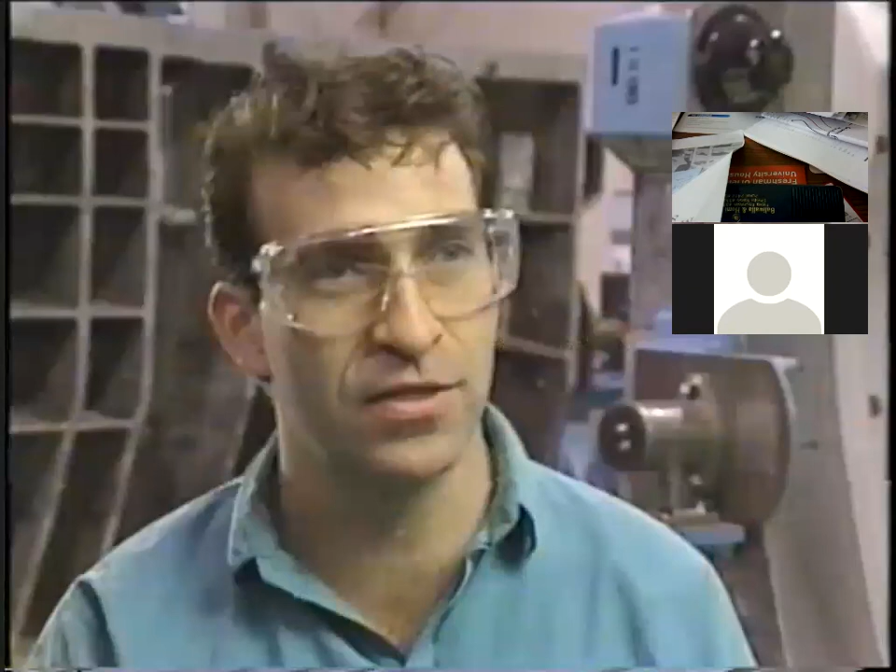Initially, I thought the 5 S's were just another one of those things that we're going to do to make upper management happy. The thought of working out of a community toolbox didn't seem possible. And our feeling about it was, we don't have time to mess with this. We have a lot of parts to build and deadlines to meet.

I didn't have a good feeling about it. I felt it would just be a waste of my time. I just wanted to do my work, and I thought it was just going to be another program that would come and go.

Currently, I'm glad we got rid of the personal toolboxes, because now I see we don't need them. I have my shadow board, it has all the tools I need to do my job. So we've had plenty of time to see that it actually does work.

So we're pretty excited about it, and it's part of our everyday process now. It makes our work easier. I can go home at night feeling that I've accomplished something rather than looking around for something all day long. Now everything's very well organized, and it makes our jobs go much smoother.

These two groups of Boeing employees have been practicing the 5 S's for some time, and they're experiencing the results every day.

A quick comment on this. I'm not going to show you the second part of the video, which is about how 5S was applied in the office. Again, you will see that this is an old video. Phil Condit was the CEO of Boeing decades ago, and unfortunately, he had a not very good exit because apparently on his watch, there were cases of sexual harassment, and he did not take action.

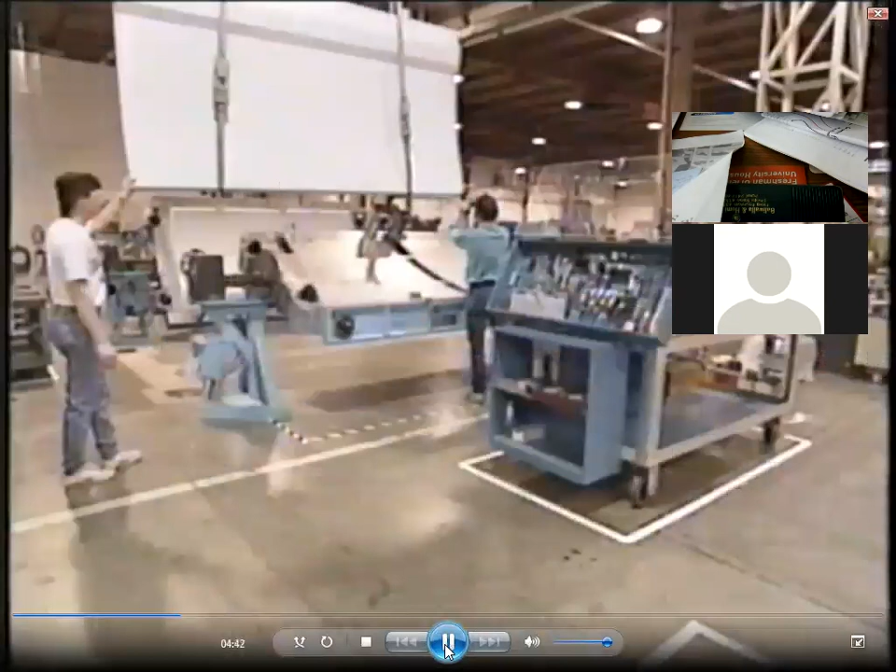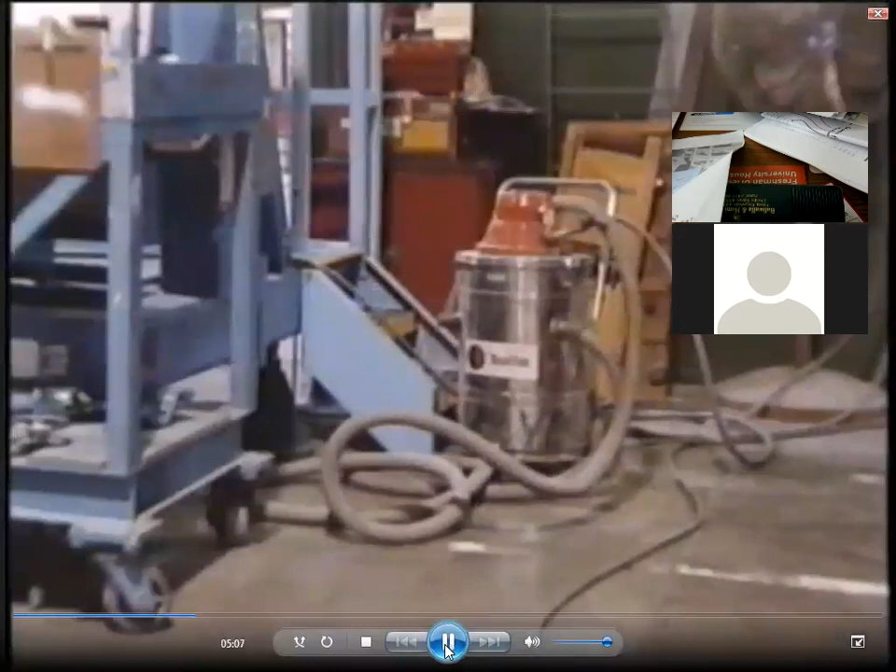Before we implemented the 5S's, our area was pretty much a mess. We didn't know it at that time, but we had workbenches that were serving as benches, tool storage, lunch tables. We were storing parts on them. Just about wherever we could put something, that's where it went. The first step to making changes in the area was the first S, sorting.

It was actually a lot of fun. It was surprising in the end when we had sorted everything that we deemed unnecessary. The big pile of stuff we had in the middle of the floor was just amazing. We had 2 or 3 SA dollies full of stuff that was carted out of here that we had decided weren't really a necessary part of our process.

It was really amazing. In the beginning, it was hard to get rid of things, but when we looked at the reality of the issue, we had to decide, do we need it? And if we don't need it, we get rid of it. If we do need it, we need to decide how much of it we need to keep in the area, and we need to have a permanent location for it.

Okay guys, the first thing we're going to do is the first step, sorting. And the way we'll get started in order to...

Sorting is not a one-time thing in this area. Several times since their initial sorting, they've repeated the process, and in doing so, have removed even more unnecessary stuff. The process starts with agreeing on sorting criteria and designating areas for small teams to tackle.

So this is important, the sorting criteria, and basically what you're doing is you're looking at every item that is in the workspace you're trying to 5S, and you're looking at usage frequency at 3 levels. One, use daily. Two, use weekly. Three, use occasionally. And of course the 4th one is where none of these 3 criteria are filled.

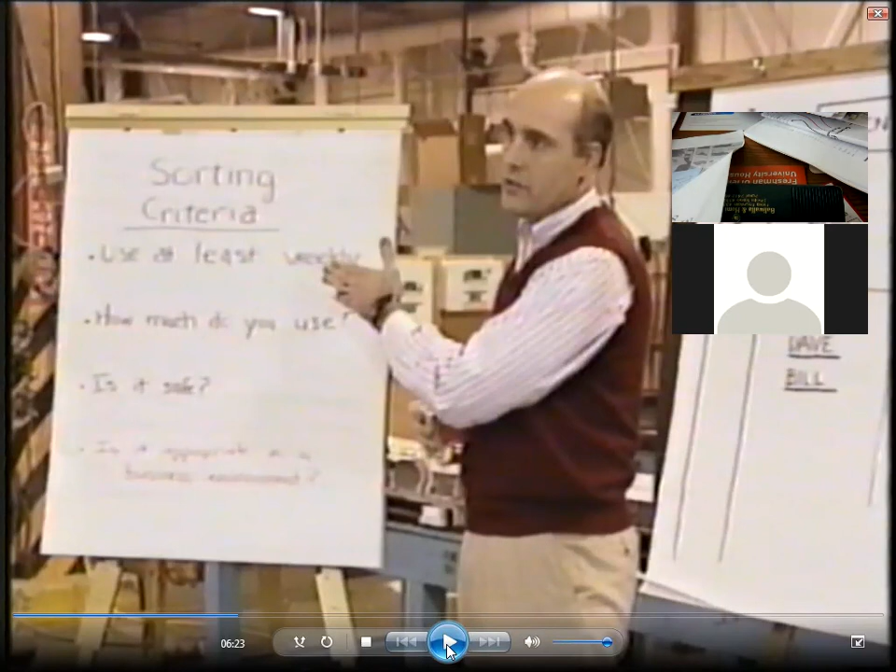Daily, weekly, maybe, but for sure not immediately in the area of work. And of course the 4th one is, yeah, this is junk. So please follow the conversation. To use it at least weekly.

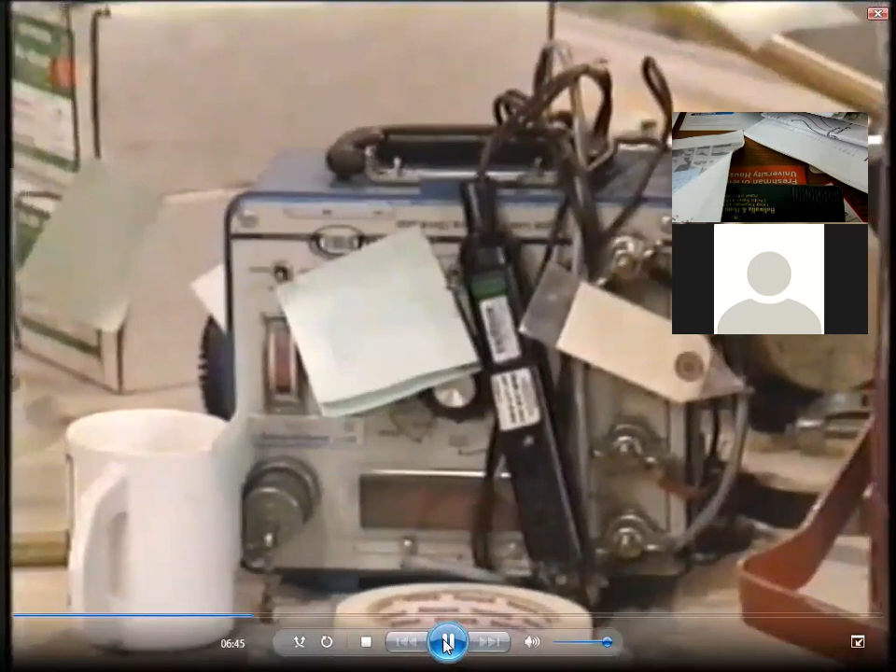The team members touch every item in their assigned area and decide if it's really needed. If they think an item is not needed, it's tagged with a Post-it note and brought to a holding area. Sounds good, I don't know what they are. Let's tag them and we'll find out. Okay, sounds good. Later, the entire group reassembles and holds a sorting auction.

Now, through the auction, they must reach agreement on whether the tagged items are indeed unnecessary. Nobody uses it anymore. Oh, let's get rid of it. Get rid of it? Yeah, all right.

Okay, we have 3 boxes of these bulbs, VG 10K42s. Who uses these? We do. Everybody does? Yeah, we use them on the main landing gear doors. How often do you use it? We use a box up in a month probably. But you use them every day? Yeah. Well what do you think? Think we ought to maybe take 1 box and leave it in the area and send the other 2 to surplus or to standards? Yeah.

Okay guys, for those of you who are taking the production planning and inventory control class, what they are verbalizing is essentially what we learn as basic inventory control models. So what do we do in inventory control? I have an item and I have a usage, I have a consumption rate, I have basically a reorder point when I should order stuff, and then I have a reorder quantity. And then I have a maximum inventory I wish to hold of this item.

If you go back into your production planning and control textbook, I use the one by Sipper and Bulfin, a wonderful book, applied and theoretical. Look at the way the inventory model is specified. There'll be a maximum inventory, a reorder point inventory, and the reorder point is managed so that the lead time is buffered against. If it takes X days to get the replenishment quantity, then that reorder point represents a certain amount of inventory, which will be consumption rate per day multiplied by the number of days it will take for replenishment, plus say a 10% safety factor.

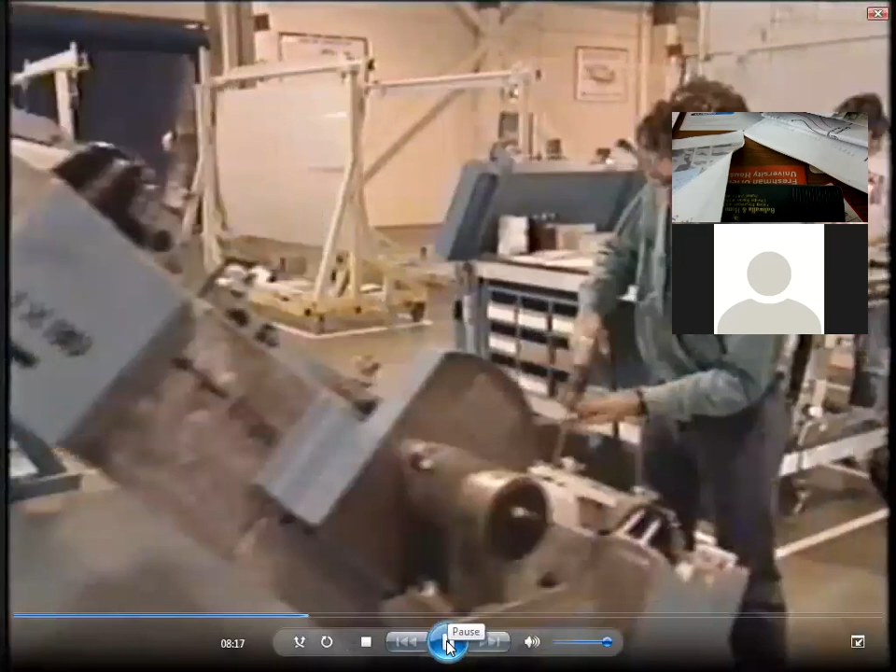Simplifying really means organizing and arranging everything that's needed so you can do the job efficiently and safely. The landing gear doors employees have created some excellent examples. They designed these mobile work tables for each of the door assembly tools. Attached to each table is a shadow board. It contains and organizes all the tools, drills, and bits they need to work.

So do you see the mobile workstation? It has the work surface, it has the tools, it has the parts, it has the gauges, and you can move the workstation to any and every location that you need. So mobility is a huge aspect of modern factory design.

I've even seen machine vendors basically saying this machine can be moved. What they do is they stick like an inflatable balloon under the machine, and then they blow it up and poof, they literally can pull the machine to its next location. So please keep this in mind: a mobile workstation, something which can be moved, and see how well it is organized.

If you see this outline, if the outline is exposed, it means somebody has taken the tool and needs to return it by the end of day before they go home. And if it is filled up, that is where the tool should be. But the condition of the tool should be as when it was taken away. You cannot put back a broken tool or a damaged tool.

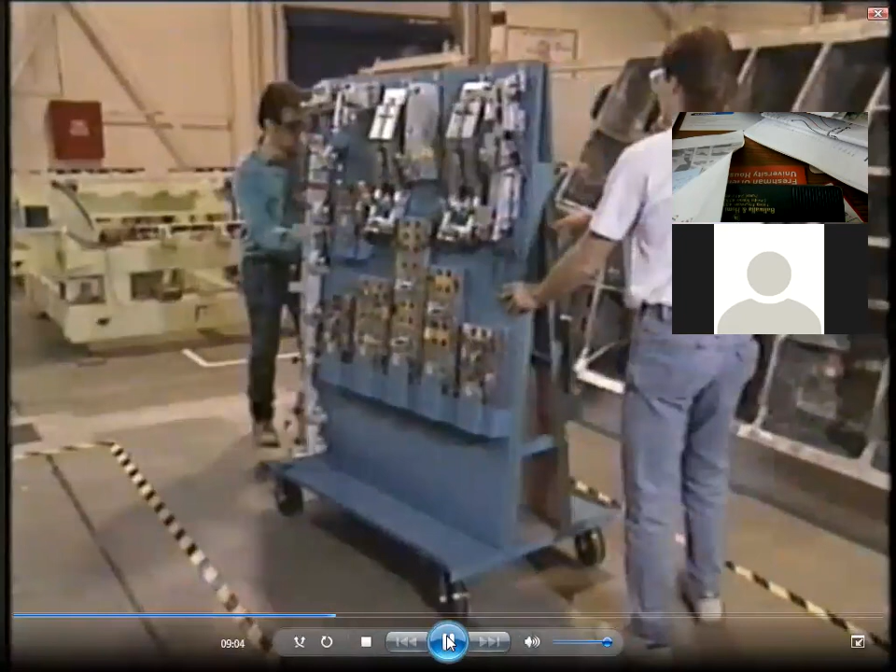Another shadow board mounted on a cart holds the drill plates that get mounted on the door assembly tool. Some of these plates weigh over 40 pounds, but because of their arrangement on the shadow board, there's no more.

Do you see now? I don't know if you study ergonomics, but that's a very big area of industrial engineering study. Ergonomics, safety, and a conducive work environment are areas where you win over employees when they hear industrial engineers and management are going to come and implement lean, thinking lean means fewer employees are needed.

No. When you look at ergonomics, do you see they've taken these fixtures and put holding handles on them? The heaviest and most used fixture is kept at the center of the board, at the safe lifting height, kind of in the midriff. So keep in mind that 5S is also about safety and ergonomics.

Bending and twisting is required to lift them into place on the tool, and the cart's mobility saves a lot of steps toward carrying a heavy load. Notice that labels on both the plate and the shadow board make it clear where the plate belongs.

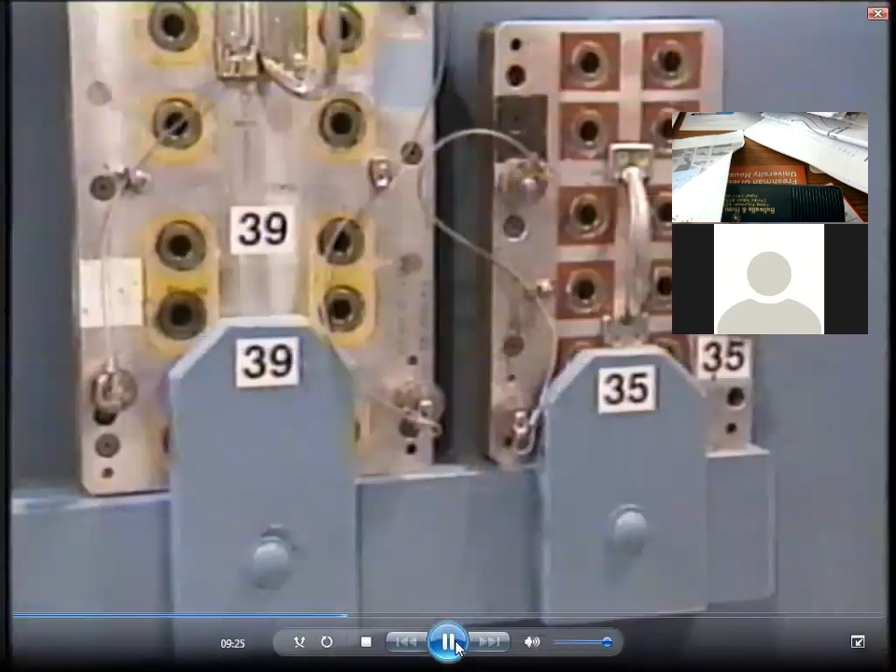Outlines on the floor clearly tell you where things that can be moved should be located, everything from mobile racks. These are white markers, and this is the identification—this square is the location for such and such cart or workstation. That is how beautiful this method is if correctly done.

If somebody is in training, they don't come in and ask what am I supposed to put in this area. Right over here, there's a label, and that label will be painted in several places on this fixture, for the doors to garbage cans and hazardous waste containers. Hazard stripes identify danger zones around equipment.

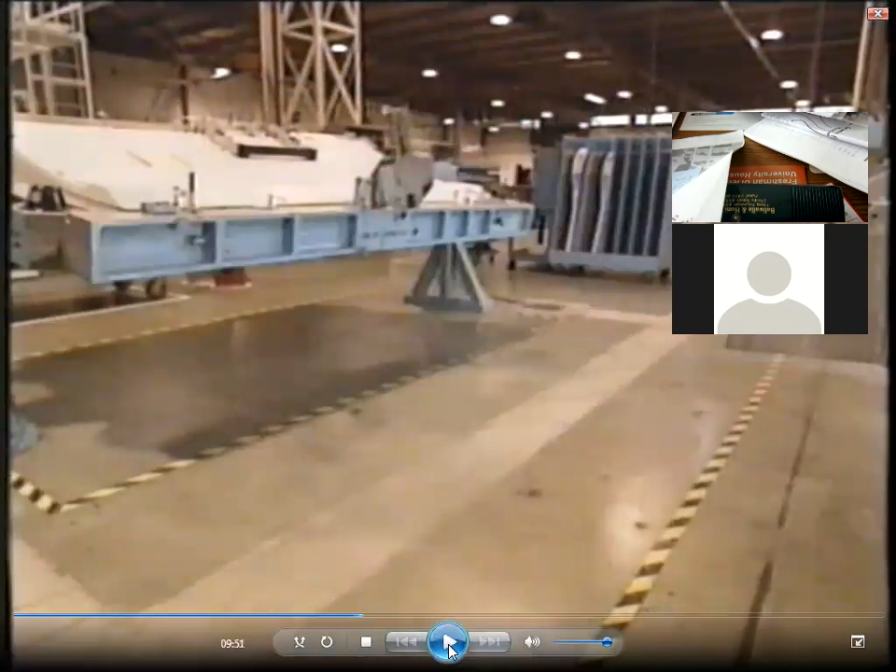Possibly the most significant change in the area is the disappearance of personal toolboxes. It's taken a while, but let me share with you why toolboxes are such a sticking point. My experience has been that it's a two-pronged sword.

Tools are typically purchased by the plant manager, who reports to the director of manufacturing or the vice president of operations. If the plant manager sees that his or her boss is cost conscious, that person is not going to agree to buying the company's own tools and gauges.

And eliminating these toolboxes. So what ends up happening is individual operators, like machinists, will say, for me to do my job, I need fixtures, measuring devices, and other instruments to make sure the quality of my work is correct. If management won't buy it, I'm going to buy it myself.

Unfortunately, those gauges have to be calibrated by inspection. When there's no accountability and personal tools aren't being calibrated, that is exactly where you end up with situations where parts are delivered to inspection and inspection says, sorry, this failed.

So disappearing toolboxes and creating what I would call community tool boards is important. There are challenges in maintaining that board, but the big thing is that all the gauges and instruments being used are standardized, managed, maintained, calibrated, tracked, and recalibrated by the shop. That's the important part of disappearing these toolboxes.

So I visually sweep the area for anything that is out of place, including our shadow boards. If some motors are missing, they're usually on the bench somewhere. I'll grab them and put them back. This is something I do throughout the day.

Of course, for a truly clean workplace, physical cleaning is also part of their sweeping routines. The physical cleanup is a disciplined part of 5S, and you have to clean, you have to sweep.

Let me share with you several personal experiences I've had. I've taken tours of many facilities, and what has been impressive about those where I had a positive client engagement is this: when I was given a walk by their plant manager or director of manufacturing, if they saw a gum wrapper or some kind of plastic lying around in the material handling aisle, they stooped down, picked it up, and kept it in their hand, saying, 'I'll be talking later, we need to keep this place cleaner.'

That shows an attitude. Let me share a very positive experience with a client called Superior Completion Services. Once on the floor, I had my safety glasses kind of stuck on my head and hadn't pulled them down. I was in the shipping area where mainly assembly occurs, but the area supervisor walked up and said, please, would you put your safety glasses on? That is how well their safety director had ingrained the safety principle of 5S into their employees. Everybody had a right to pull up, advise, or cajole their colleague because it was a company standard of safety.

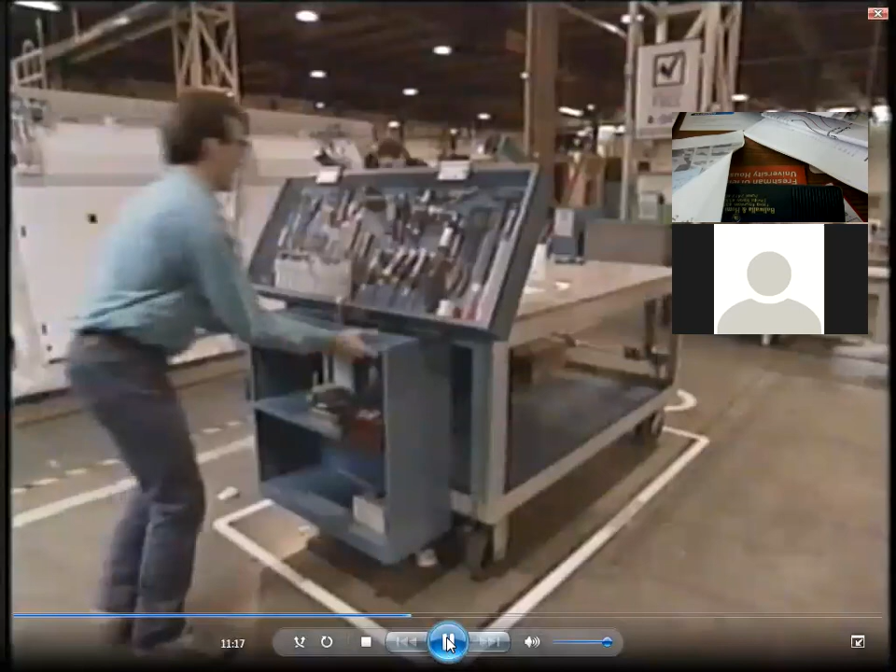By the way we have our area set up now, it's much easier. There's no clutter, not a lot of things around on the floors everywhere. So the cleaning is real easy. Since most of their equipment is on wheeled carts, the group can sweep and clean up more efficiently and thoroughly. It's an ongoing thing. You can't just say, well, we clean up 15 minutes at the end of the shift. We don't do that. It's ongoing, always.

Standardizing means having a specific process that everyone follows, no variation. Remember the Toast Kaizen assessment we had for the course? I think till now probably only one team has done it well, and that's not their fault. I think I misled them that the eVSM software has a good template. I don't think it's very good.

But standard work instructions, even for making toast, right? Basically you design the toast making process so it has the least number of steps, the least amount of quality problems, and the least amount of labor content. Same thing - this is standard work instruction.

Why? At a certain point, anybody can be trained to do a particular job in a certain way. And if you attach videos online on a local server, training can be done asynchronously. But the beauty here is that safety is taken care of, quality is taken care of, cycle time is taken care of - because there's a standard process being adopted.

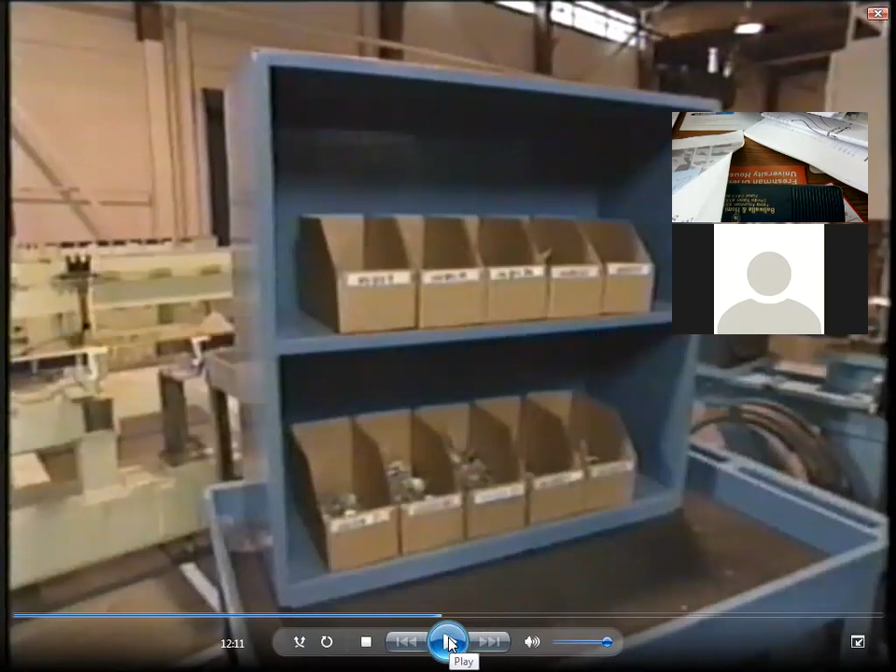Do you see, for those of you who are mechanical engineers and familiar with design for assembly - this is one of the big areas. Designers who sit in the office and don't talk to shop employees just pick a fastener for a design. Material is different, threading is different, tensile strength is different.

Over time, even for such basic items, there's so much upfront cost to purchase and hold inventory of each item, put reorder point labels, and pay for a minimum buy quantity - just for little items, forget the high-end ones. So when you standardize, you even come back and ask, do I really need so many fasteners? You can apply that thinking across the board to hardware items.

You can even apply that to bar stock, raw material sizes across the board, and to tooling inserts. So standardization essentially impacts how much time, money, and material you waste because of the changeover from one type of item to another.

Arranged on a mobile cart, this order matches the standardized sequence in which they install the fasteners in the door.

Another example of standardizing are the shadow boards for the two door assembly tools. There are shadow boards for both the left and right doors. The crew designed the layouts for these shadow boards to be identical, eliminating searching for tools when switching from work on one door to the other.

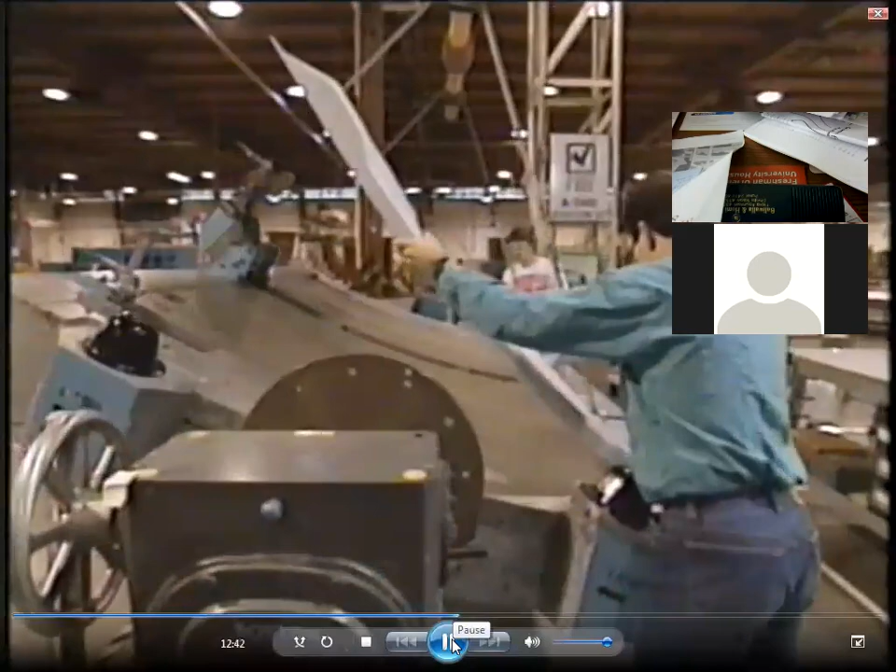As an outgrowth of their 5S activities, the group has also begun to standardize some of their work processes. In the past, before the 5Ss, we used to put tools or do our processes in any open space that we had on the floor.

Doing the 5Ss has really organized us. We now do our process flow. Our incoming comes in, it's identified, it goes straight into our tools, out of our tools, onto the floor to do the floor work, into seal.

What shape of the alphabet is this? U, correct? You see, in assembly, the U shape makes complete sense. You take something, a line of a given length, and you almost split it into thirds: 1/3, 1/3, 1/3. Inside is where people work, outside is the logistics. That's pretty much why U layouts are so popular for most work cell arrangements. The paint, it's almost like a horseshoe effect.

It is not easy to be self-disciplined in the 5S program. It's something that you grow into. It becomes natural, it becomes habit. The longer you work at it, the better you become at being self-disciplined.

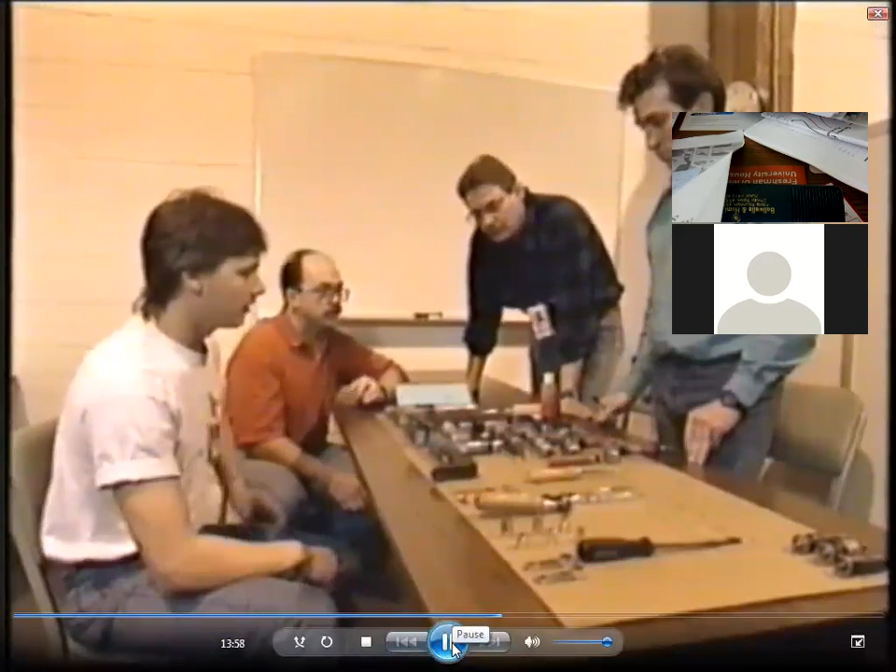Self-discipline is just something you have to have if it's going to work. In our case, on the FHAs, if you run out of a certain size drill bit, the self-discipline kicks in when you go and replenish that drill bit supply instead of sneaking over to the other FHA and stealing one of their drill bits or something like that. But self-discipline goes—watch this portion.

This is essentially layout done at the workstation level. So the whole challenge is: I have so many tools, and I need to find locations for all of them. In this case, they have what is called a functional layout, meaning all tools of the same type are arranged by size in one area.

I don't agree. I think there are situations, especially in maintenance and repair facilities, where they've actually created toolkits—tool bags hung on the walls with labels. For this task, pull this toolkit. For this task, pull this toolkit. People just walk up, pull that bag, and walk to the site because that's the task they wish to do.

So again, a lot of this is videotaping, and you can see people working, but everybody gives input saying why: because when I do the work, this is how I use various combinations of tools. So the 5S Shadow Board process is a very team-oriented, analysis-oriented activity.

Beyond the individual, the group has learned that they must work at the 5S's as a team. This includes getting input from everyone who could be affected by a 5S improvement. Everyone has to participate in 5S. It isn't a one-person thing. It's a group effort, and without the group, you're done.

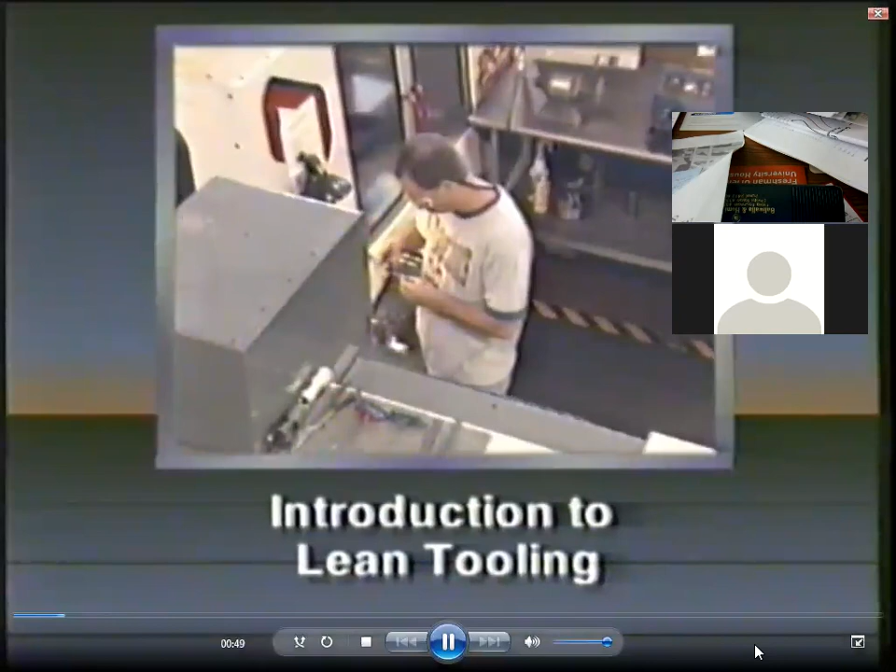This program is an introduction to lean tooling and shows you how it's used to cut costs, reduce lead time, and improve quality. Many companies are turning to lean manufacturing to reach the high performance output their customers demand. Regardless of what type of manufacturing you do, machines and tooling play a critical role in your business performance.

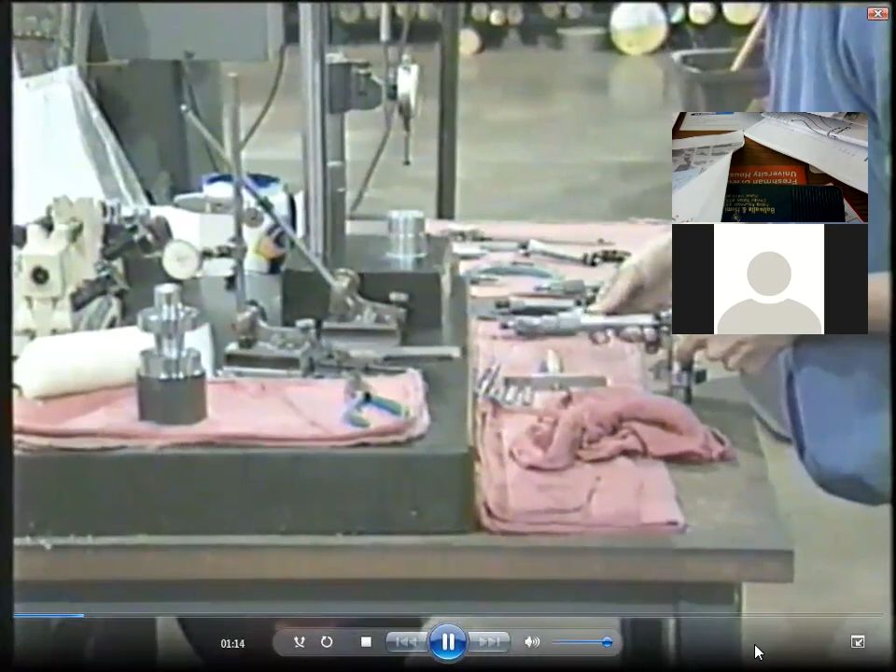The basic thinking behind lean manufacturing programs is the elimination of waste. Much of this waste is caused by the poor management of tooling, inserts, clamps, and gauges. Lean manufacturing defines 7 wastes that are so costly they're known as the 7 deadly wastes. They include searching and waiting, transport, excess inventory, overproduction, overprocessing, unnecessary motion, and defects.

Lean tooling helps eliminate these 7 deadly wastes. You can waste a lot of time during the hunt and search.

That's the main part. If you're going to have throughput, you don't want people leaving the cell, and you don't want to waste time looking for things. You want to make sure a tool is easy to find, easy to keep track of, and in proper repair, so when you go to use it, it's ready to go. This way you minimize scrap, minimize lost time searching, and you can satisfy the customer.

Lean tooling has 2 primary goals. The first is to have any tool in the hands of the person who needs it within 30 seconds. The second goal is to have any tool operational in less than 10 minutes from the beginning of the setup.

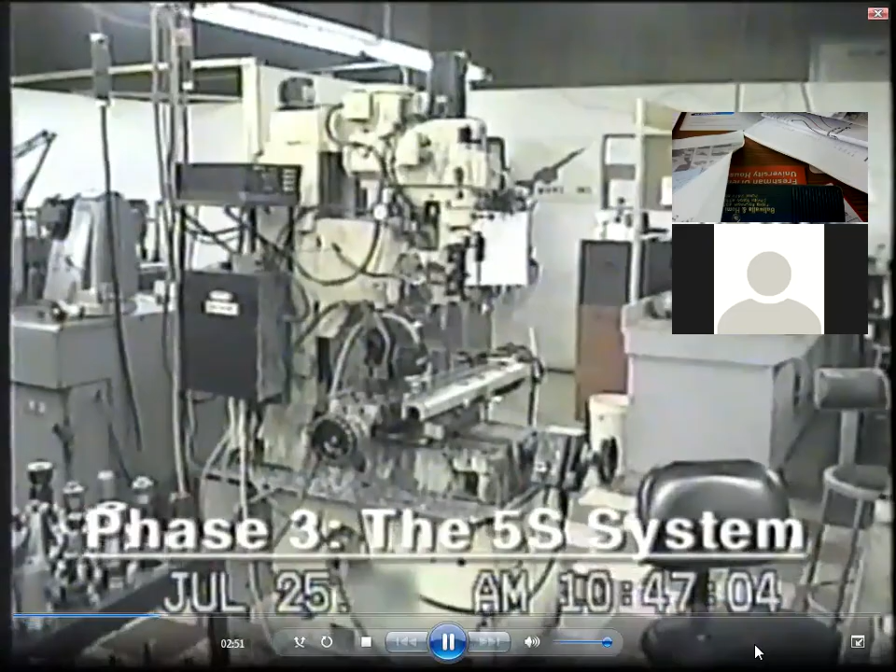An effective way to implement lean tooling is by following a 5-phase plan. Phase 1 prepares the project by creating a clear vision of your goals, getting management support, and forming a strong cross-functional team. Phase 2 studies and measures the problem, so there's an in-depth understanding of all the issues, obstacles, and barriers. In Phase 3, before attacking any tooling problems directly, you must remove many of the generic workplace problems you'll confront by applying the 5S system for workplace organization.

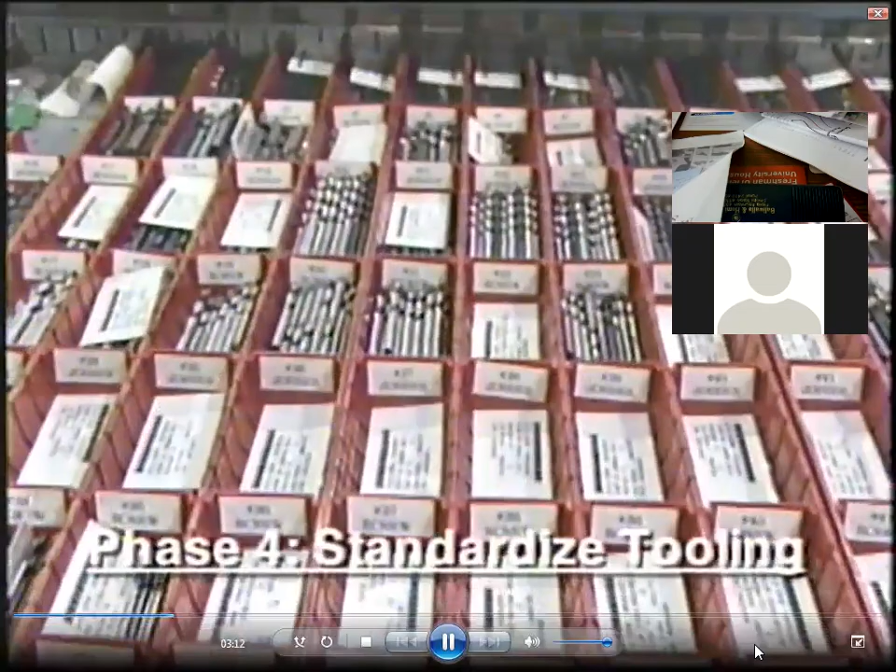In Phase 4, you will standardize tooling activities at the point of use and throughout the plant. You will create new designs for tool storage and management, and implement visual displays and controls. Finally, in Phase 5, you will implement a plan to stabilize tooling and sustain your gains through audits and problem-solving methods.

Three activities occur in Phase 1: getting management involvement, identifying target areas, and forming a core implementation team. The most important of these activities is getting management involvement.

The Lean Tooling Workbook has a list of 10 management issues you can use to rate management involvement. The best way to use this list is to complete it as a group so everyone can evaluate the management commitment. Unless the workers see management support, with upper management directly participating in their teams, supporting their decisions, and helping fund the projects to keep them driving, they feel it's just going to be another flavor of the day.

To get started with lean tooling, it is best to select various target areas for improvement and then prioritize them. Each area should have an assigned champion who has time available for these improvements. But to be totally successful with a lean tooling program, it must eventually be implemented throughout the entire plant.

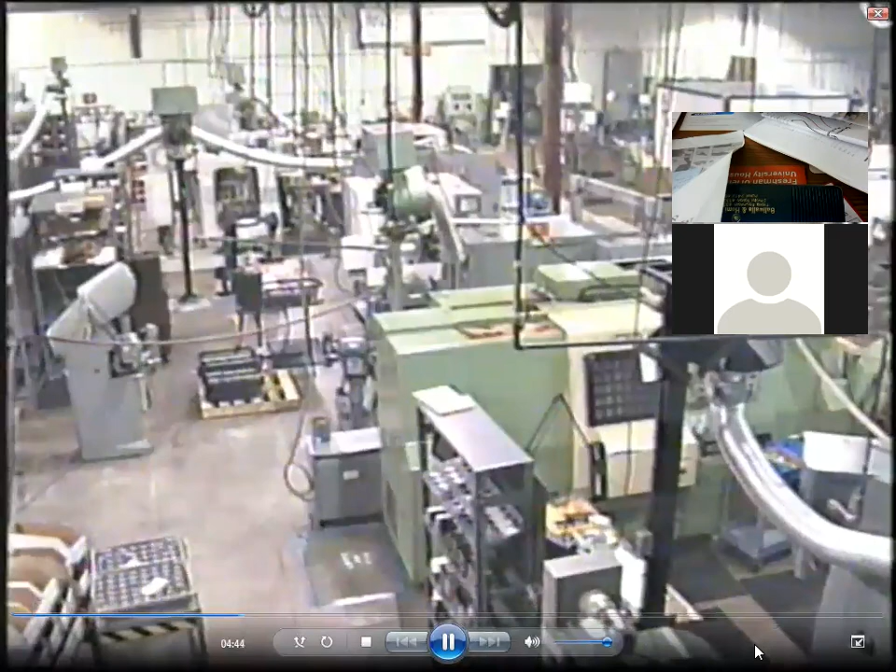As an example, this plant chose to perform lean tooling on most of its machine cells first. Then it moved the tool cage to the center of the factory, changed the layout, and started a Kanban system to control tooling inventory. Their next step was to organize the quality department and remaining cells. Well-planned changes allowed this company to get the most return for its investment and convinced skeptical managers and employees alike of the need for a total lean tooling transformation.

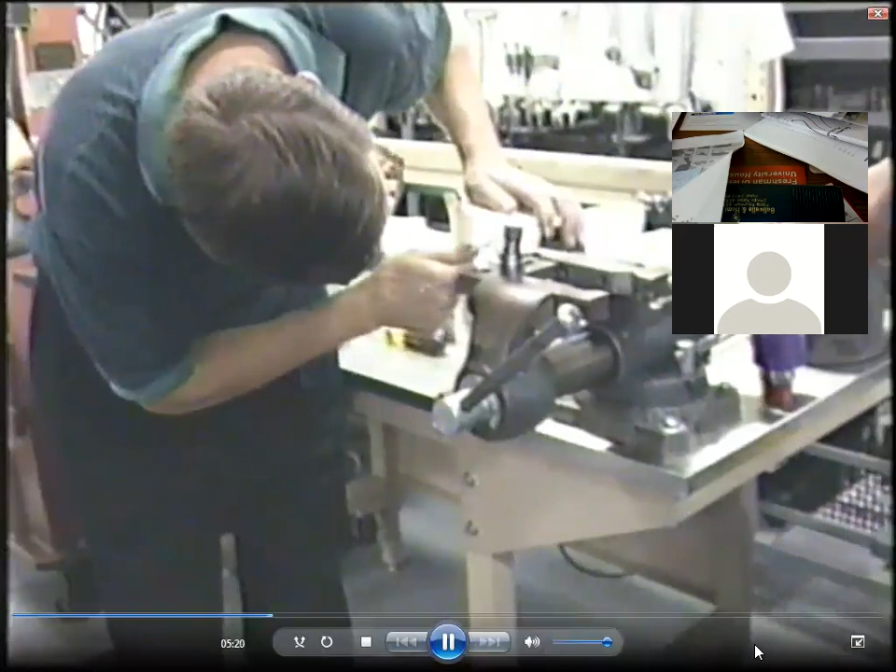Teamwork is crucial to making lean tooling successful. Lean tooling teams must include the right people, with proper authority and the resources to make changes. Members must understand how the company generates profits and how lean tooling affects the bottom line. Each team must also include frontline people who are closest to the details.

Occasionally, a team may have extended members outside of the production workforce, from the engineering or design staff. Now the team is ready to study and measure tooling in the target area.

Phase 2 begins with selecting a way to measure the current productivity of your tooling. Methods such as photography, a diagnostic checklist, a target statement, and a project storyboard can be used to measure your current state. But the focus of Phase 2 is on measures.

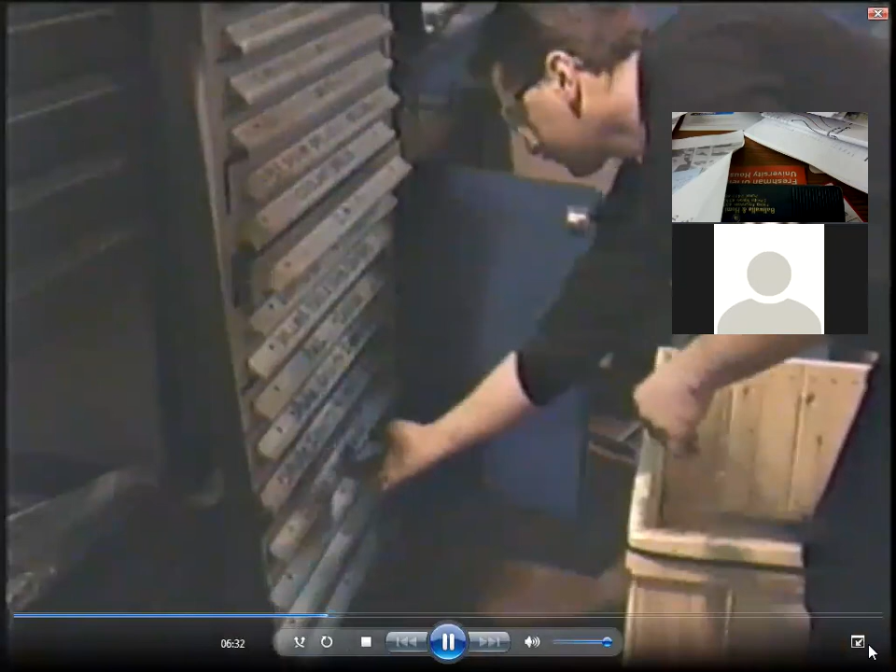Begin your measurements by looking at the two basic goals of lean tooling. The first goal is to have any tool in your plant in the hands of the person who needs it within 30 seconds. So your first measure is how long it takes to get tools into the hands of the person who needs them. The second goal is to have any tool operational in less than 10 minutes from the beginning of setup, so the second measure is setup time.

Setup time is measured from the time you made the last good part to the time you make the next good part. Anything in between is wasted machine time. Another good measure is the percentage of total revenue you spend on perishable tooling.

Of course, to really study the measures, I just wanted to interrupt here to stress a point. You know, tooling, when you look at machine shop supplies, between tools and coolant and fixtures, whatever, I've heard that the total cost could be in the 300,000, 400,000 area. Really significant, and that's just the material purchase cost. You won't be able to believe how much downtime exists when they have a simple blooper.

So what they have is a tool crib in one corner of the shop, and they buy inserts, drills, boring bars, etc., and they keep them there. This is the so-called common tooling. Now individual machinists need inserts, so guess what? They leave their machine and walk to this tool crib. They start looking for those inserts, and the inserts have not been organized. They're basically in drawers with no count whatsoever.

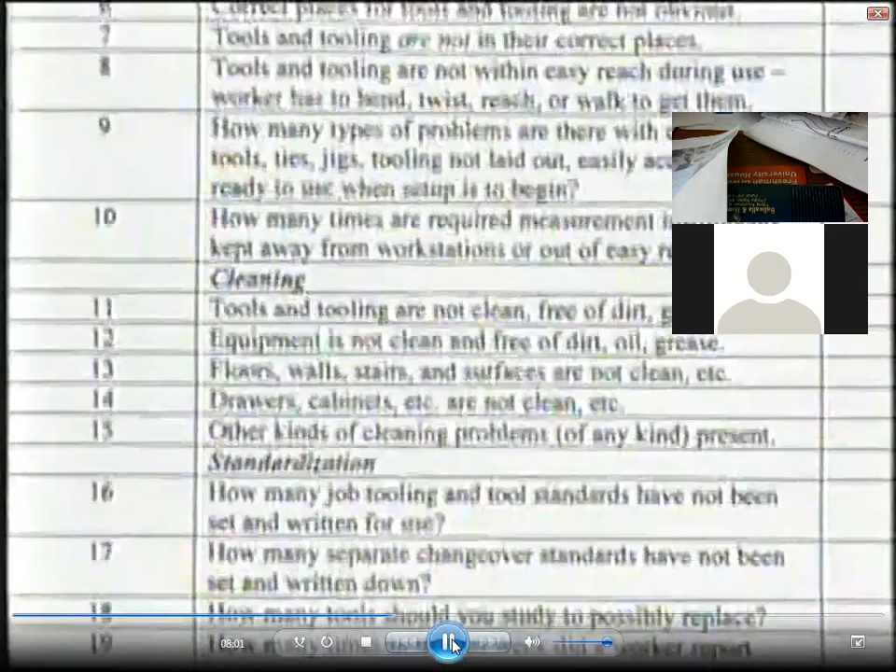Before making any changes, take photographs of the current state. These pictures can provide visual details to measure existing conditions in the target area. While taking photographs, you can also apply the Lean Tooling Diagnostic Checklist. By rating your target area in all 5 areas, you will gain an in-depth understanding of your current state of tooling and a clear list of where improvements are needed.

In most cases, this in-depth examination exposes problems few people knew about.

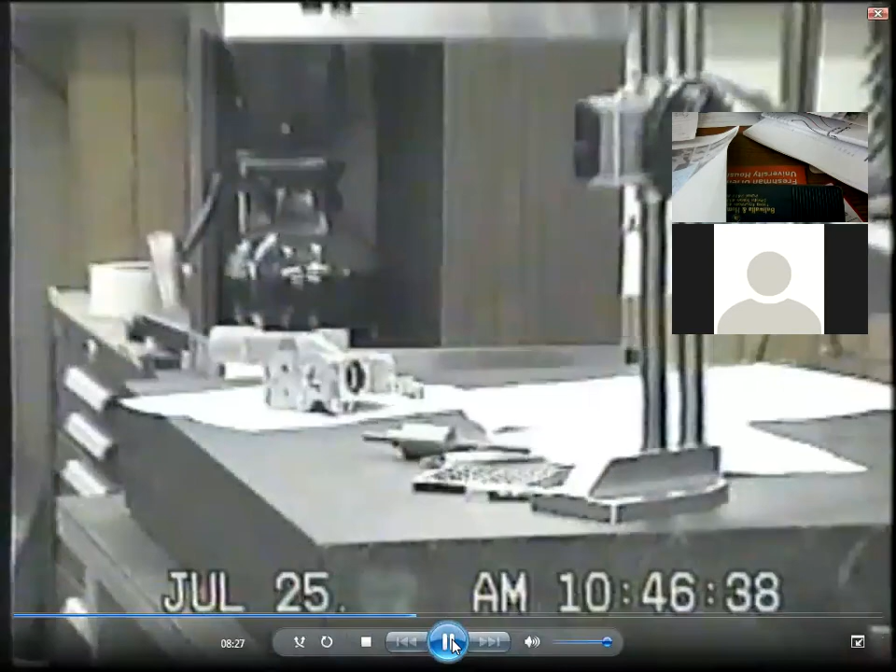Now it's time to bring it all together into one target statement. The purpose of this target statement is to explain exactly what the team is supposed to achieve and how they will measure it. It should be written in simple language. A good target statement also tells us the current rate, target rate, and why it is important to meet the target.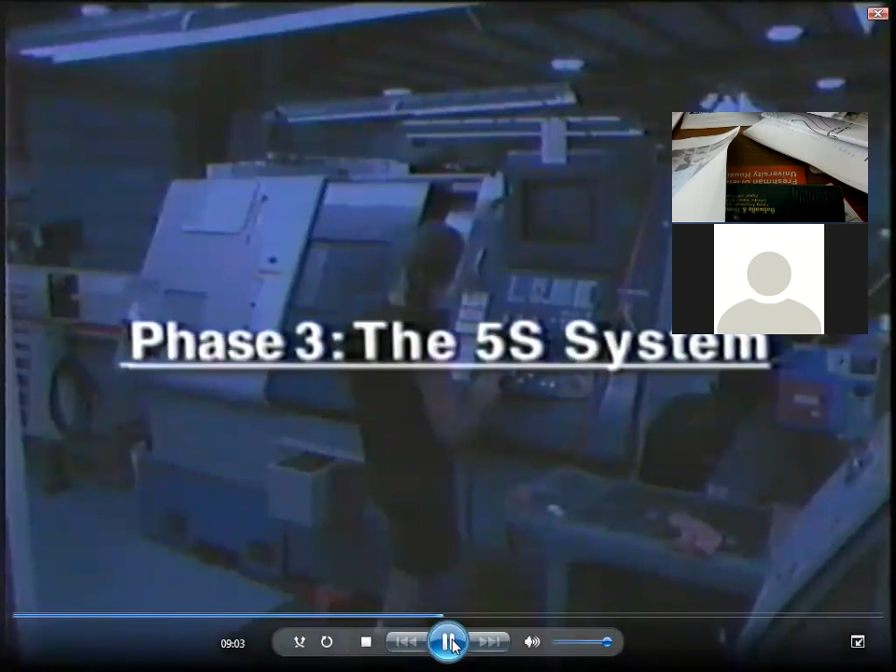Before attacking tooling directly, you need to clean and organize the work area following the 5S system. This will prepare the area for tooling improvements. The 5S system consists of 5 activities with names that begin with the letter S. They stand for sort, set in order, shine, standardize, and sustain.

Sort involves sorting through the contents of an area and immediately removing unnecessary items to a holding area. This includes large items such as old equipment and small items in drawers and cabinets. The rule for sort is: when in doubt, move it out.

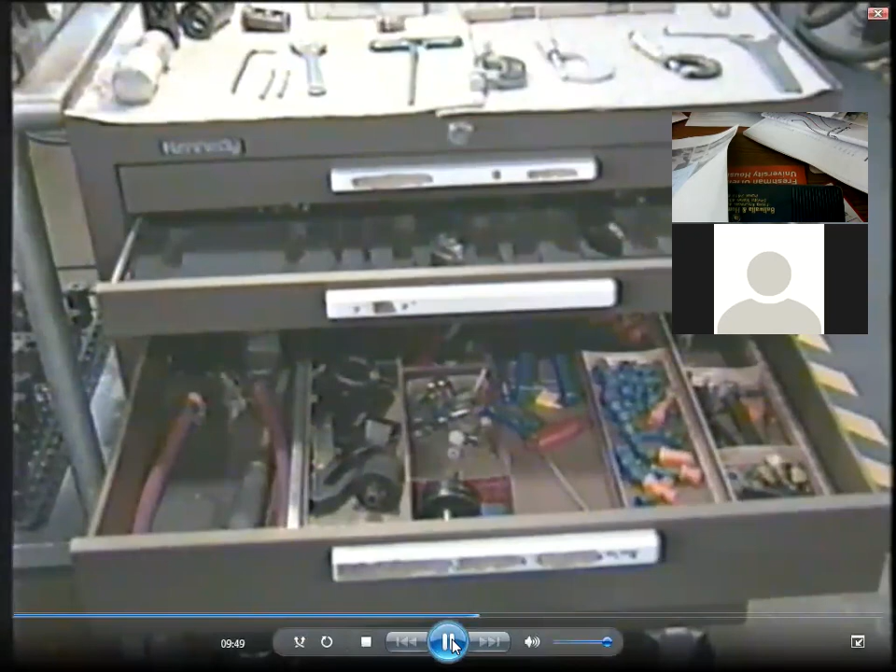Set in order involves arranging items for easy and efficient access and use. There should be a place for everything, and everything should be in its place.

Shine means cleaning everything and keeping it clean. The essence of shine is inspection through cleaning.

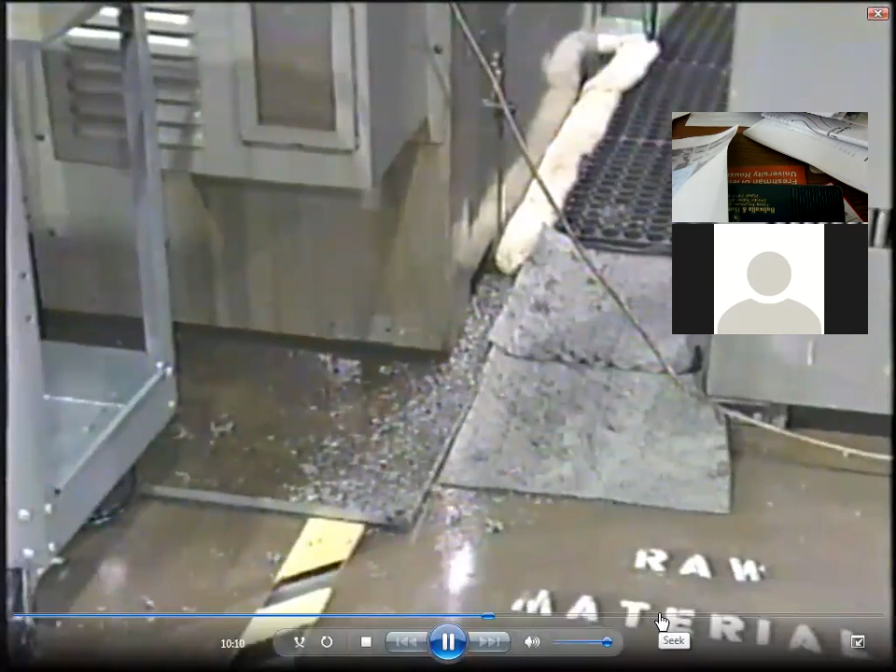Standardize involves creating guidelines for keeping the area organized, efficient, and clean. This includes visual controls such as lines, labels, signs, and color coding.

Sustain involves communication and education to ensure that everyone follows the 5S standards.

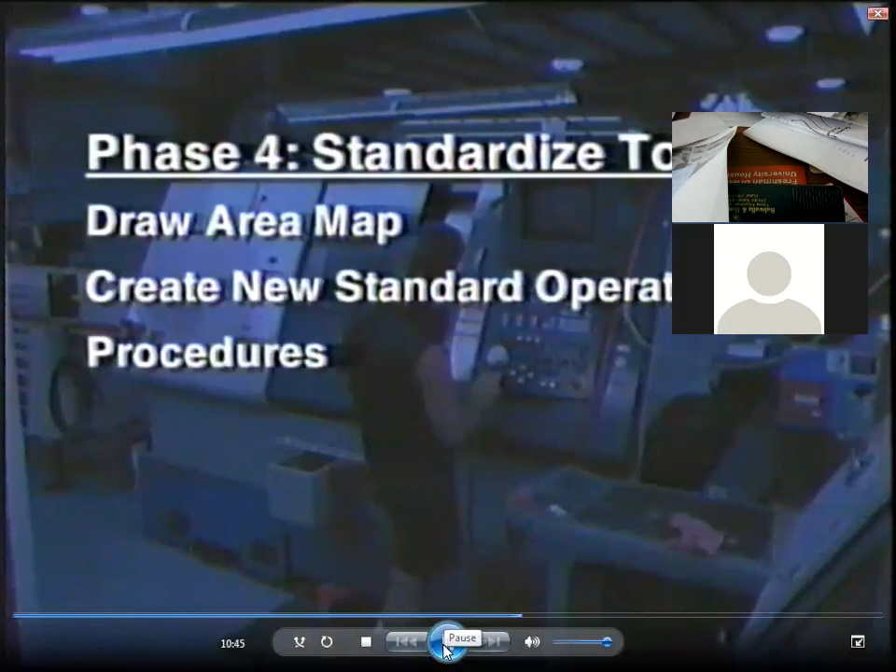In phase 4, you'll draw an area map to understand how your current tooling standards operate. You'll create new standard operating procedures for tooling, bring order to the point of use tooling, and redesign the workplace to support new standards. Guys, go back to the toast Kaizen.

I know it was only a question of, they're just making a slice of toast. But if you look at these steps: draw the spaghetti diagram, create the standard operating procedure. Remember, that was the future state flow process chart. Bring order to point of use tooling. All the tools needed, all the materials needed were at the point where he buttered the slice of toast when it came off the toaster. And then you redesign the workplace to suit that particular workflow.

What you did with the toast Kaizen is basically now applicable to just about any workplace where material is physical. Now, if you were organizing an IT system, I don't know much about that, but again, in an IT system, instead of machined parts, you've got documents, decisions, and data elements being transferred. Same thing. You just have to create a spaghetti diagram and then organize which server, which database, which app will have the appropriate items of information.

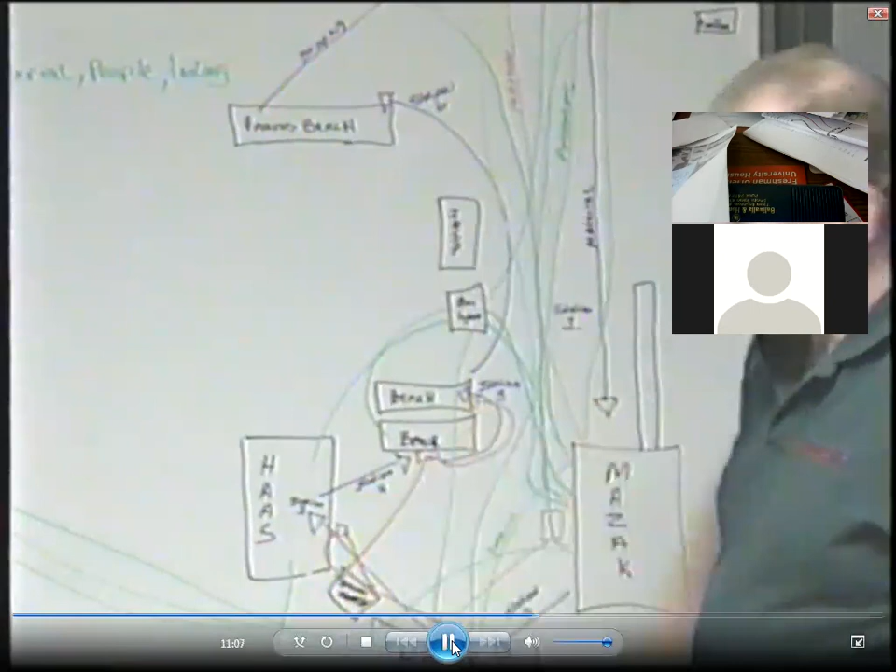Then you'll implement visual controls to reinforce the standards and the new design. The area map shows the position of all items and workstations in the target area, especially tools and tooling. The arrow diagram is drawn on the area map to show the flow of all activity.

As you draw your arrow diagram, pay close attention to where tools are used, delivered, stored, maintained, or reordered, and the routes that are traveled between these activities. Later, when you redesign the workplace, you'll draw a proposed diagram to replace the current state.

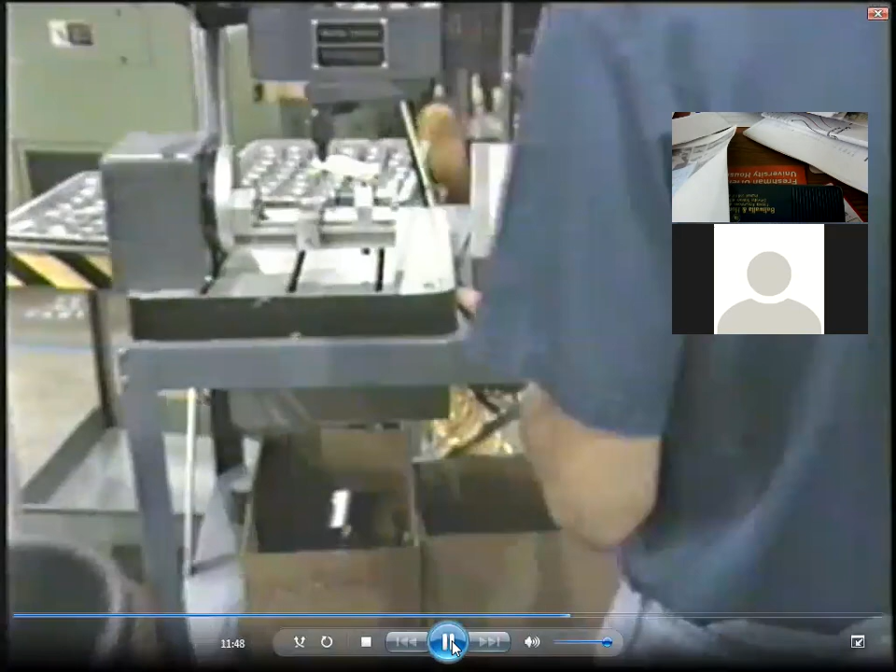Now it's time to create new tooling standards. New tooling standards determine the best and easiest way to perform tooling activities. They also provide a foundation for new employee training. For lean tooling, every activity must have a standard operating procedure.

The best place to start when creating standards for tooling is at the point of use. Tools and tooling are managed differently than raw materials and finished parts. Tooling needs a standard way to be returned after use. In addition, standards are needed for how tools are sent out.

I want to sound some words of caution to you. Be a little careful about not getting too drawn into, ooh, shadow boards, shadow boards. If you notice, many shadow boards tend to be designed for those cheap, hand tool type of items.

You saw that whole storage area for raw material, all the bar stock, so horribly organized. Believe me, when you look at exotic materials and when you buy in bulk, and then as you cut the raw material piece from say 30 feet and now you have drop pieces, drop losses, if you aren't smart about organizing those leftover pieces and reusing them for future jobs, you end up throwing away that as basically scrap, along with all the chips coming off different machines.

God forbid you lose thousands in unnecessary buying, storing and carrying cost of raw materials. So think about 5S not so much for the little screwdrivers, pliers and shadow boards, but the storage, accountability and traceability of expensive tools.

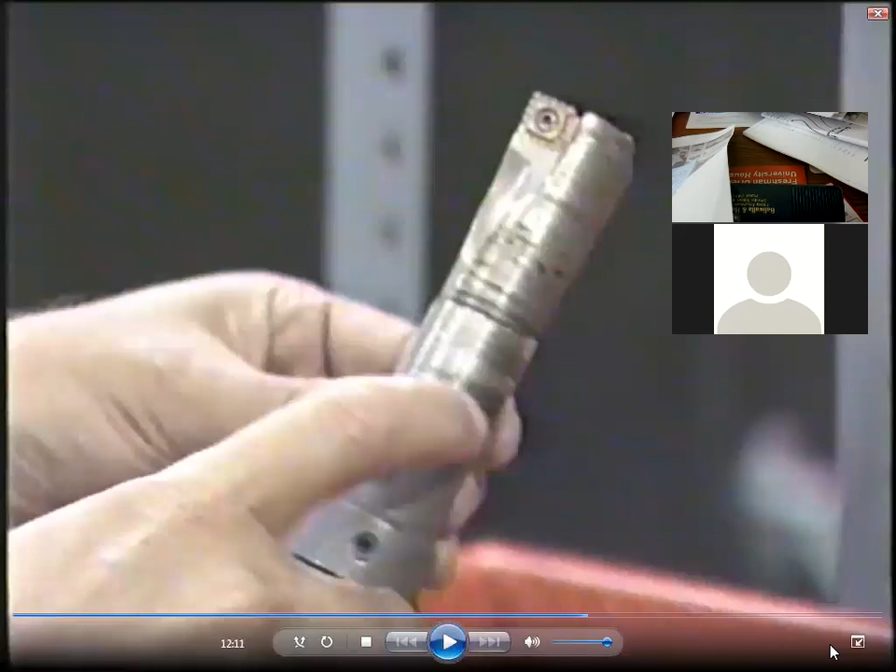Up to be repaired or sharpened. There are 5 simple steps that will bring you better control over your tools at the point of use.

The first step is to remove all the tools from their point of use and return only what you need. When you do return them, store them in logical groups so they can be easily located and replaced.

Next, create visual controls so tools can be located and returned quickly. Clear labels and color coding will help you find what is needed faster.

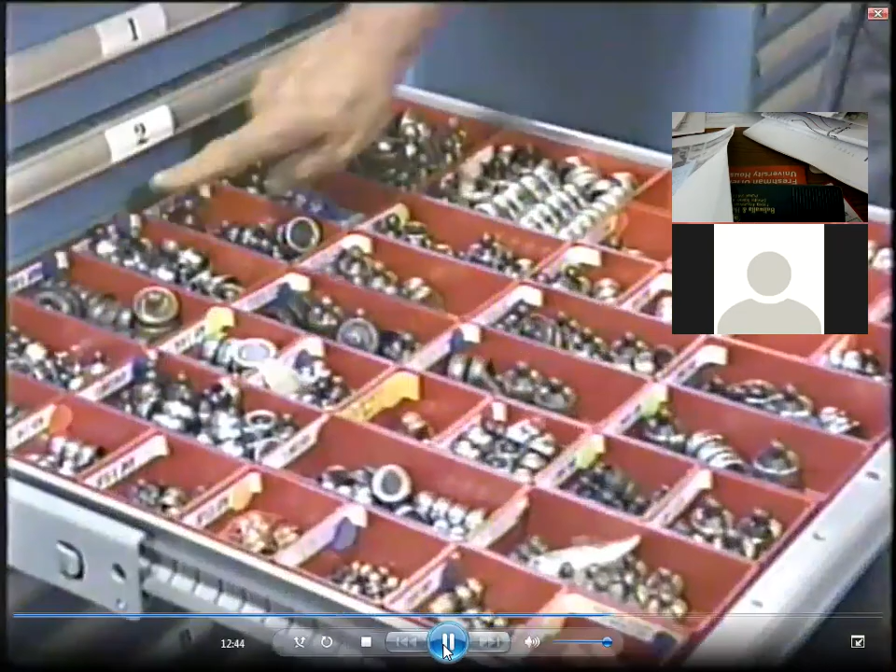The third step is to make the point of use design so simple that the worker knows it by heart. Other methods include putting tools in the order of procedure or enlarging dimensions so tools are easy to grab.

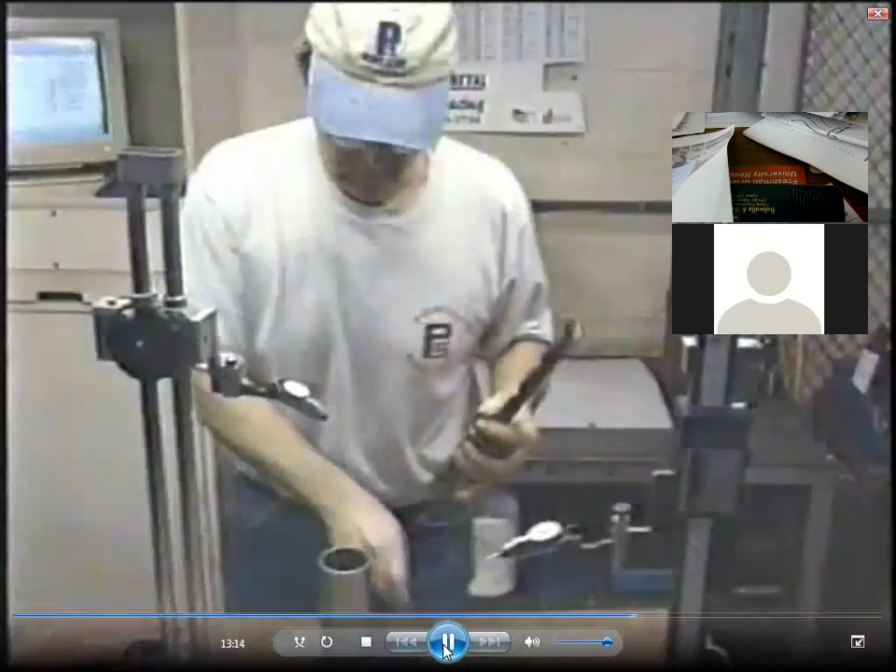The fourth step for point of use control is to install retractable tooling. The fifth step is the elimination of tooling. At this level, you try to eliminate the need for a tool entirely. You'll often see elimination employed in setups where much of the work is performed prior to shutdown, therefore eliminating the need for any point-of-use tooling.

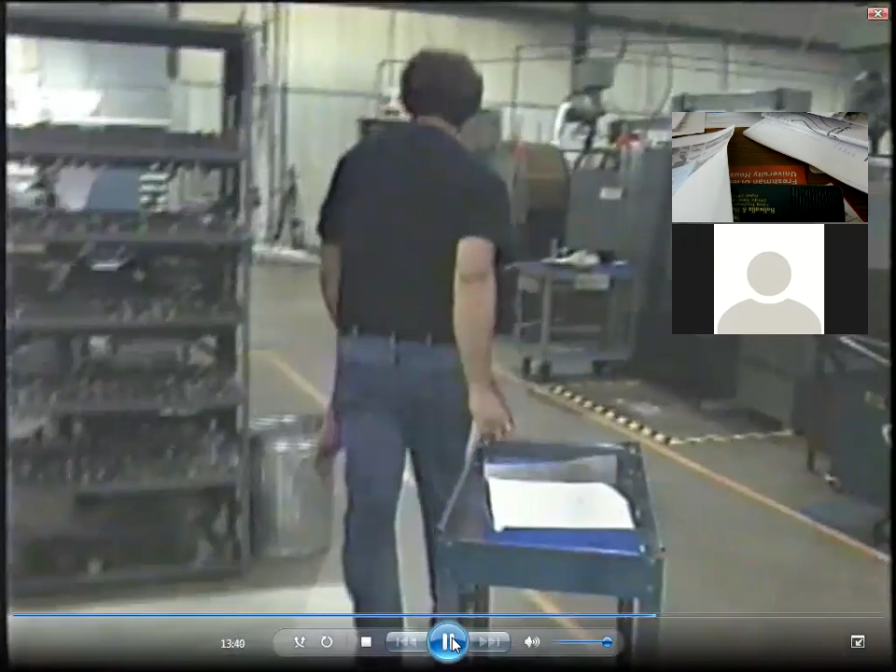Lean tooling requires a new way of looking at things. One issue to consider is eliminating personal toolboxes to free up floor space. Since many tooling activities happen away from the point of use, designing efficient methods to move tooling is important.

The first method is... let me add a little bit here. They've shown a person pulling a tool cart. Google the term water spider. The water spider is essentially a shop logistics person.

Some of the best people you can have is to take some of your best machinists and convert them into supervisory or water spider roles. Why? Because as a supervisor, you're assigning jobs to different machines. Also, as supervisor, you have one person's oversight on the tools, gauges and inserts being collected for a particular job. So now what happens is that machinists stay at their machines.

I've heard that fully burdened rates for machinists could be anywhere from $80 to $120. Now, when you look at a basic machine shop of 20 machines, and the machinists are going around trying to get the tools and things, that's a lot of downtime on the machines, as well as payroll paid for non-value added work. And that lost time is then made up through overtime over the weekends. That's a lot of money being lost.

So this water spider, I think, is a very important logistical role that most machine shops may or may not implement. Personally, that's the first thing I try and do.

I implement work cells, and I try to do the supplying of the work cells - everything from bringing parts to rolling away parts, tools, coolant, instructions, first article inspection, everything. I try to ask, gentlemen, can we bring a couple of water spiders on every shift to operate the shop? So that role is very important.

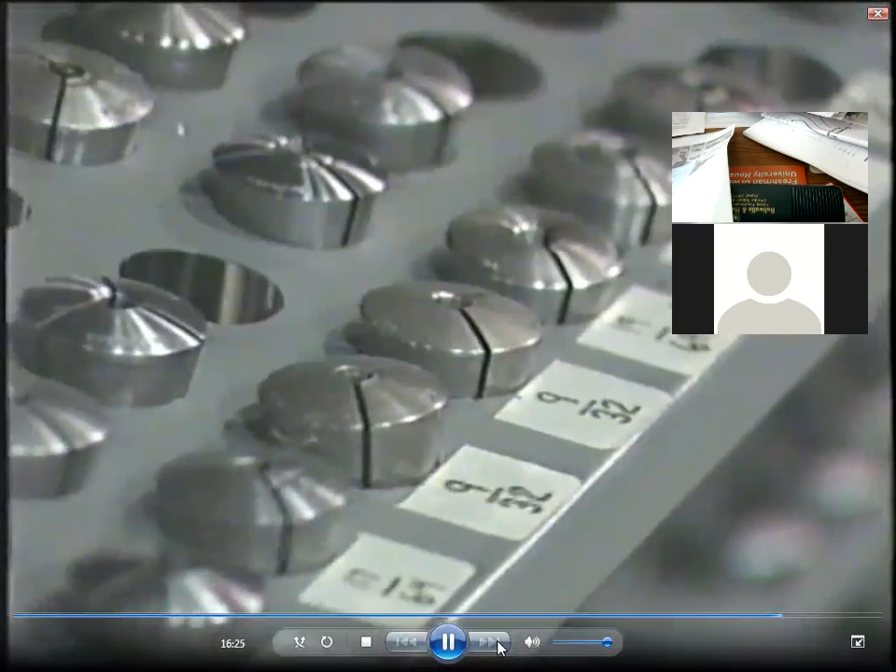You're now about ready to wrap up your lean tooling project and make sure you can maintain your gains. And that's the purpose of Phase 5.

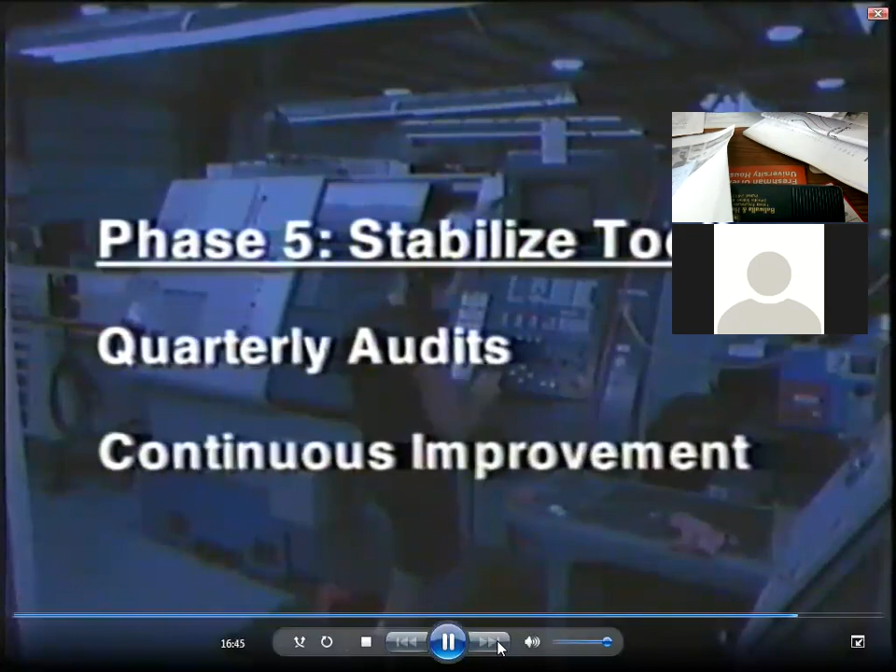In Phase 5, lean tooling is no longer a project. It becomes part of everyday work. So to ensure that you maintain your lean tooling focus and standards, you should perform quarterly audits and continue to work on ways to eliminate waste in tools and tooling.

Every company is unique. However, regardless of your size, type of product, or tooling, there are 4 lean tooling keys that remain constant. The first key is measurement. Make sure you choose your measurement carefully. Continue to measure and post the results for everyone to see.

Measurement brings focus. The second key is a no-blame environment. Remember that it is the system that is at fault, not the people. A no-blame environment brings participation, energy, and buy-in.

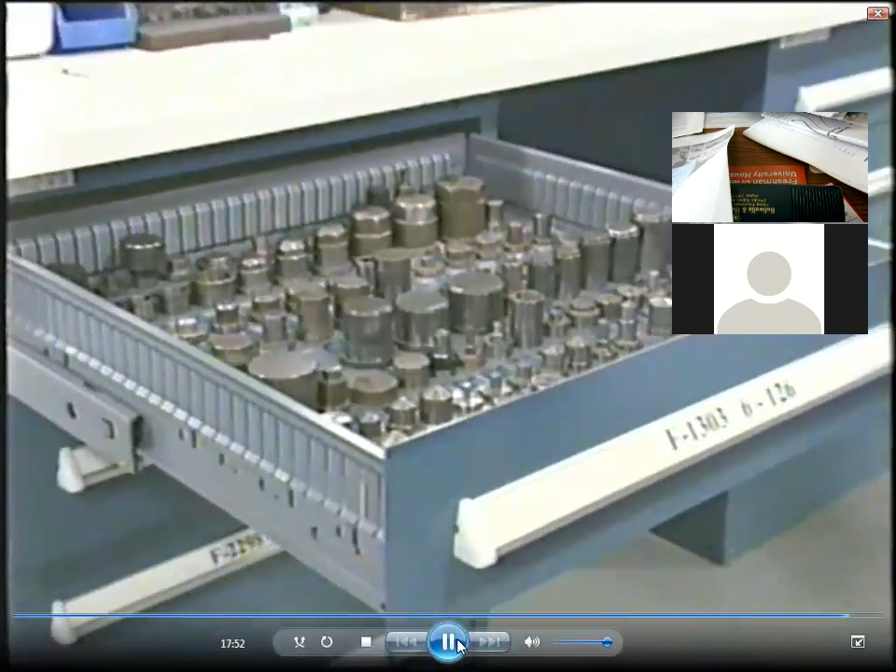The third key is the 5S system. The 5S is a way of thinking. The 5S system brings lean thinking to the shop floor every day. And the fourth key, the one that ties it all together, is teamwork. Teamwork brings all the necessary...

Going back again to something we learned, and I hope to discuss it again: remember the work cell video, customer-focused manufacturing? If teamwork is the way to create a certain work ethic and attitude among people to implement 5S and look at tooling management in a systematic way, then what you have to do is build the team around the value stream.

Go back to what the value stream is. It's a visual representation of the material flow, the production control information flow, and the measurement of a product family. So what does the work cell do? The work cell is designed to, as much as possible, be in charge of producing from raw material intake to finished product output of a family of products.

That's what I push: wherever you can, if you create work cells and assign each work cell a product family, you can apply these 4 principles to get the best of teamwork. So you have value stream focus, teamwork, and accountability that management can impose on a particular team, rather than saying everybody who works in that department is a goofball.

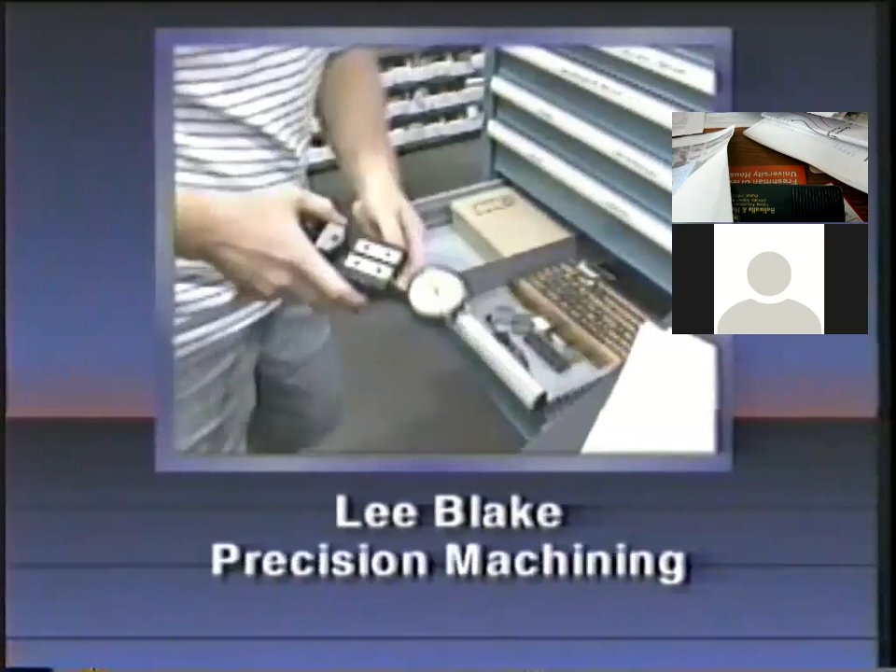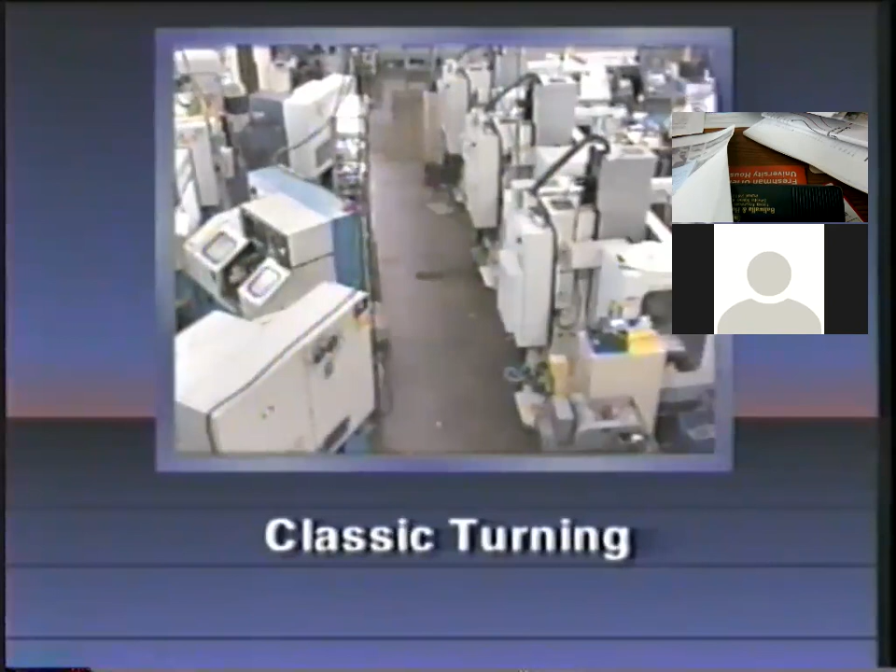Manufacturing Insights, Manufacturing Engineering Magazine's video series for process improvement. This program shows lean tooling in action. You will see how companies are getting the right tool at the right time. At Lee Blake Precision Machining, a supplier of parts for aerospace, automotive, and medical industries, they've integrated lean tooling into their daily work practices, saving a tremendous amount of time and money. At Eaton Aerospace, Aeroquip Fluid Conveyance Division, who manufacture fluid conveyance components for the aerospace industry, improvements are based on visual controls, lean tooling, and good 5S practices. At K&A Machine and Tool, a supplier of precision machined components for the aerospace industry, a Kanban tool management system has increased machine capacity and lowered costs. And at Classic Turning, a supplier of precision machined components, employees are solving tooling and changeover problems through teamwork and continuous improvement.

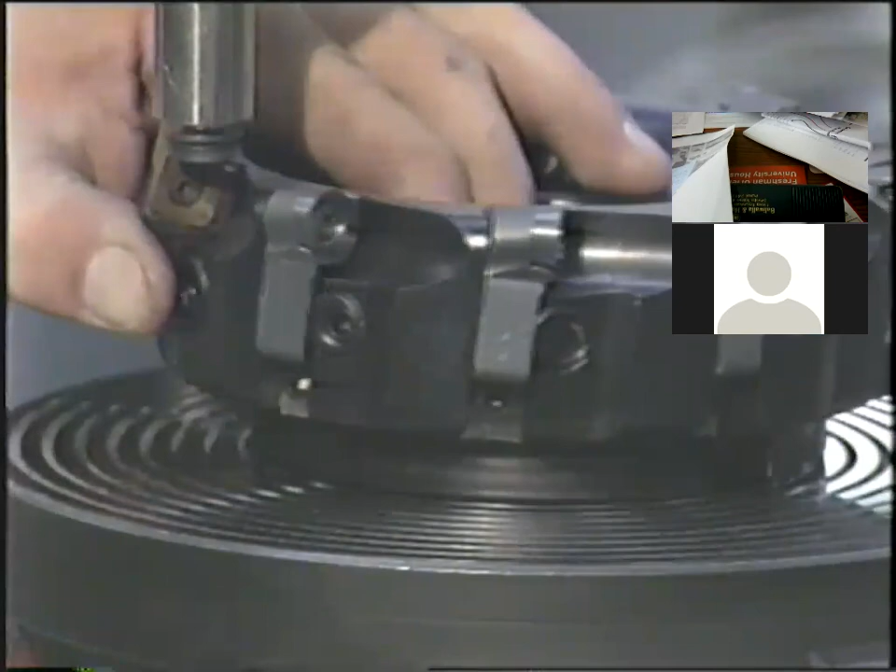Lean tooling has 2 primary goals. The first is to have any tool in your plant in the hands of the person who needs it in under 30 seconds. The second goal is to have any tool operational in less than 10 minutes from the beginning of setup. The results of these 2 goals include faster throughput, higher capacity, lower costs, and greater customer satisfaction.

But to accomplish lean tooling, your company has to demonstrate self-discipline while answering yes to some tough questions. Are tools always where they are needed, when they are needed, so there's no searching and waiting? Are your tools ready to use with all of their parts in place so that setup time is minimized?

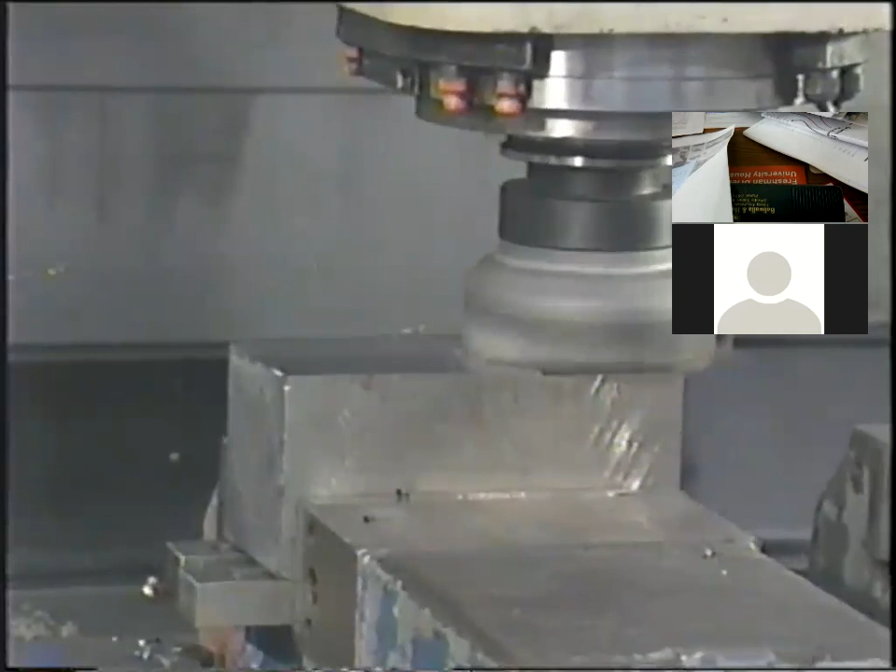Do all tools work correctly so that there's no rework and as little scrap as possible? Can you rely on your tools for precision so that inspection time can be minimized or even eliminated? Do you know exactly when it's time to replace your tooling so that production goals are met and just-in-case inventory can be eliminated? Do you inspect tools as you clean them so that you can catch problems before they happen?

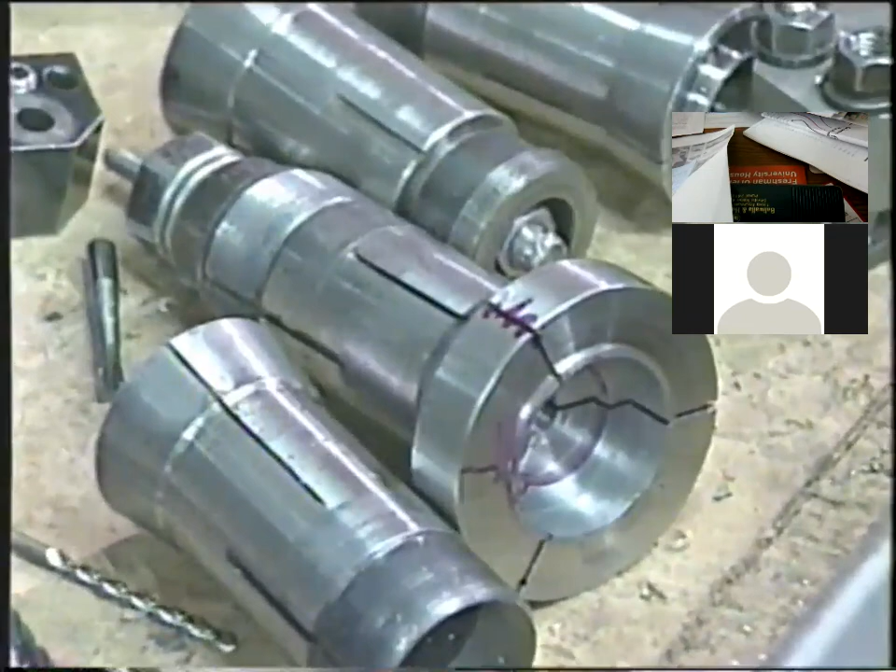Have you reduced the administrative costs of tooling management? Do you track these administrative costs? A good lean tooling program eliminates all this unnecessary time and expense from the chaotic use of tools and tooling.

Lean tooling is a necessary part of your manufacturing program, one that brings immediate and powerful results. Lean tooling promotes a workplace where people want to participate and learn because it deals with the tools that people handle every day. When people practice lean tooling, they begin to feel like they can control the work, so the work doesn't control them.

Lee Blake Precision Machining in Jackson, Michigan is a supplier of parts for the aerospace, automotive, and medical industries. At Lee Blake, lean tooling has become integrated into the overall manufacturing process. It begins with serving the customer on time.

If we didn't have well-organized tooling, if we didn't know what our tooling stock was, what its abilities were, and have it all either decentralized at the cells or in our organized central hub where we send it out to the cells, we wouldn't be able to respond.

At Lee Blake, lean tooling fits in with the workplace culture. And I think that unless the workers see management support, that they have upper management directly participating in their teams and supporting their decisions and helping fund the projects to keep them driving, they feel that it's just going to be another flavor of the day.

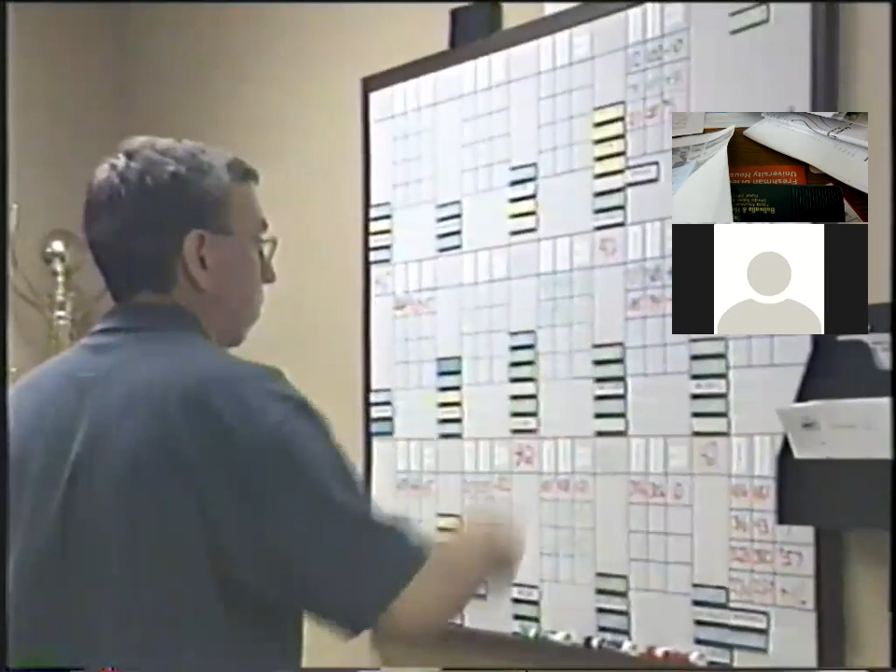At Lee Blake, lean tooling is built into every step of the production process. After the front office creates a new process router for each job, it is brought to the production office where 3 Kanban cards are written. These cards trigger activity throughout the plant.

One card is delivered to the materials department so that appropriate materials can be prepared for the job. The second card is delivered to the quality department so they can locate the correct gauges for the job. After the gauges are boxed, the same card is used to identify them for the setup team. But the primary card is posted on the production board to trigger production and tooling activity.

The production board is a visual map of the shop floor. Each job is assigned to a specific cell. Once a job is assigned, everyone knows what tooling will be needed and when. The production board alerts the setup teams to gather tooling, gauges, materials, and download CNC programs to the cells before the machines finish the last job.

But lean tooling could not function unless the plant was first cleaned, organized, and standardized. This tool crib we built from scratch, and we just painted a blank area, put up a crib, and then our old crib was located in the far corner of the plant. And it was a catch-all for everything.

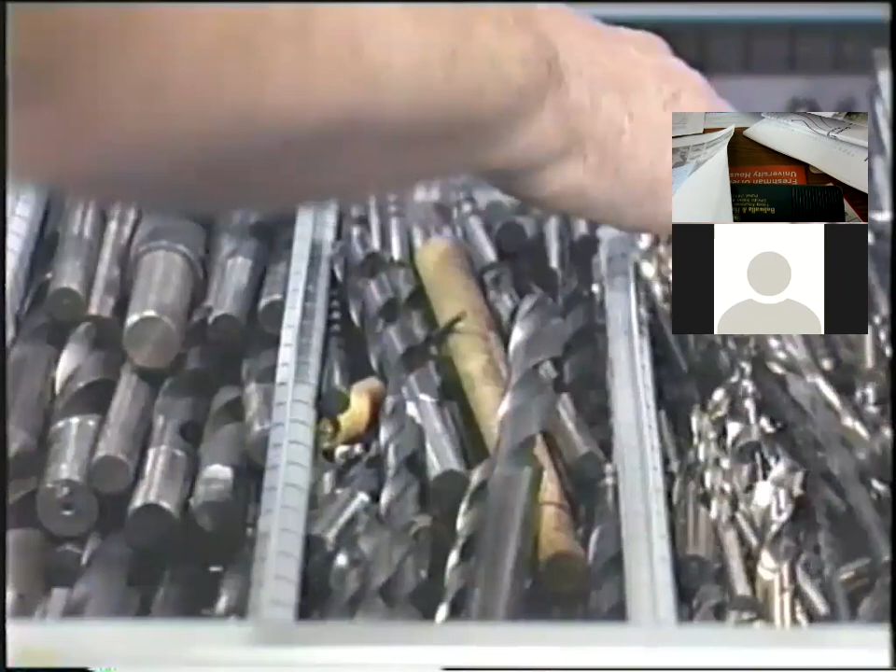Before lean tooling, there were no standards for which tools were to be kept within the cells. Now, only the necessary tooling is kept at each cell. Cells are now kept organized, with drawers containing plastic cubbies, and free inserts in each cubby.

Imagine that entire manual system, the item location, having 2 partitions in each container. The front partition of that cubby hole contains loose inserts - that's bin 1. Behind that, the second partition contains the safety stock, some more inserts, which until the next replenishment is done, stay in bin 2. They'll be pulled out and put in bin 1, and then the Kanban card acts as a trigger to say please bring more inserts of this particular type and replenish this location.

That entire manual process today has been replaced by automated vending machines. You can just Google vending machines for tooling, consumable tooling, and you'll find there are at least 3 or 4 of these vendors. Kennametal does it - they not only make the tools, but they even sell the machines which do the replenishment.

Now, the challenge I've heard is that with consumable tooling, people go in, pull the inserts, and never bring it back. If an insert breaks or gets worn out, it's pretty much recycled - that's what's called consumable. The reusable tooling - big milling cutters, boring bars, big gauges - those have to be pulled, you associate the person who pulled it, then they have to be brought back. You have to make sure it was returned in good condition, and then maintain the inventory so the next person can pull it, take it for use, and bring it back.

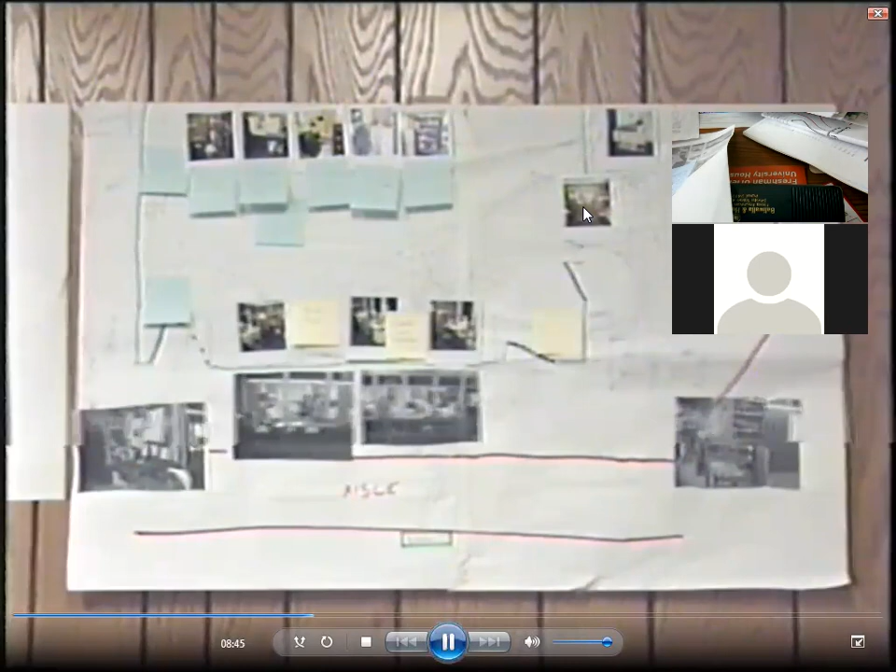Pictures of the problem areas highlight what a lot of the problem was, and most of the workers were amazed how messy it really was. Then we started doing arrow diagrams to chart our flow of activity, and we saw that there was a lot of wasted motion, a lot of waiting and looking going on.

Before lean tooling, Lee Blake spent 5% of its total revenue on perishable tooling. After lean tooling, it has lowered this expense to 2.5%. Even though we're using more expensive technology than ever before, our tooling costs continue to decrease because we're more aware of what's happening with our tooling. We're more aware of how much we're using, and we're more aware of what it's doing, what our ideal speeds and feeds are.

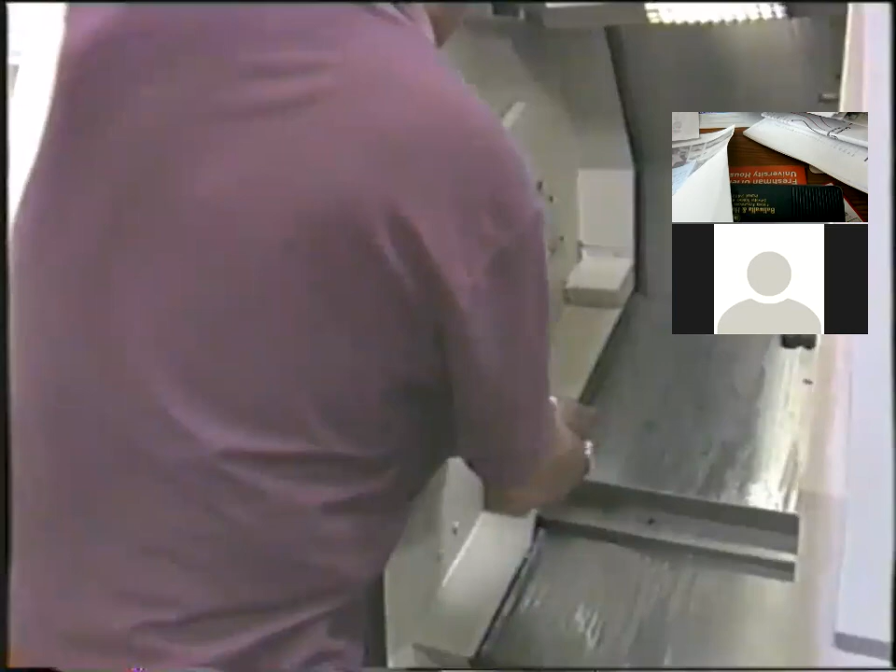Eaton Aerospace Aeroquip Fluid Conveyance Division in Jackson, Michigan, has turned lean tooling into a science by using the principles of 5S, visual controls, and just-in-time. Eaton plants have thousands of different tooling components, and they needed help controlling each component. Joe Adams, an Eaton plant manager, explains the issue: we have literally hundreds of tools to keep track of, so having a system that's easy and visual to maintain is critical, not only to make sure we have the right tool at the right time for throughput issues, but also to maintain our overall costs of wasted time, motion, and searching and looking for tools.

When Eaton began its lean tooling project in 1994, it was clear that some aspects of tooling had been neglected. Is the tool there when I need it? Is it ready to go? If it's not, what was wrong with it? Was it lost? Was it misplaced? Was it broken? Then we try to capture those costs. So what we're trying to build is really a database of what that really costs us when tools aren't in the right place, when they aren't ready to go.

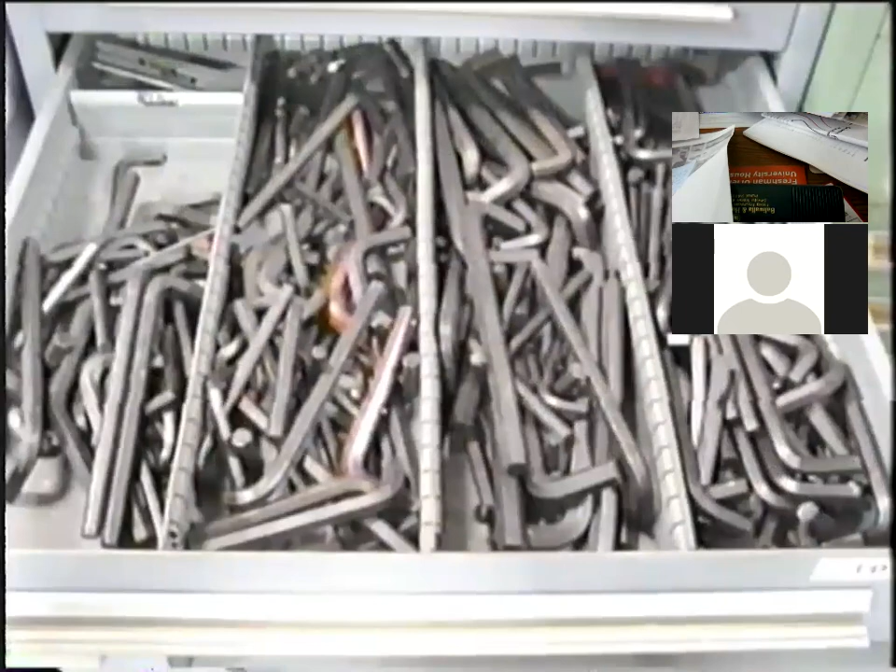Before they began lean tooling in their plant, Eaton's tools were disorganized and hard to find, and they had more tooling than they needed, including some outdated tools. The first step of the 5S program eliminated 21,000 drill bits and thousands of other tools worth thousands of dollars. They were able to sell those tools or send them to other plants. For inserts alone, their backup storage in the tool crib went from 4 cabinets down to less than 1 cabinet. So Eaton now carries thousands of dollars less in tooling inventory, and it also freed up a great deal of floor space.

At the assembly cells, disorganized tooling added time to everyone's work. Kim DeForest, an Eaton trainer, was involved in developing a supermarket system for tooling. A lot of the assembly tools were in various locations and you weren't sure what cabinet they were in, where they were located. We've since taken these central stores and put them in numerical order and identified all the tools and individual locations of the drawer so they're easier to access. Determining which tools were to remain in the cell and which ones were to be delivered only when needed was one of the first decisions to make.

Do you see that? Remember we talked about the 5S principles? The item is used every day, the item is used weekly, and the item is used occasionally. This is again those same principles kicking in. I have a work cell; I cannot put all the tools that the work cell needs inside the cell. And sometimes the cost of the tool is so exorbitant that it has to be a shared resource and kept at a central location that can be accessed by all the cells.

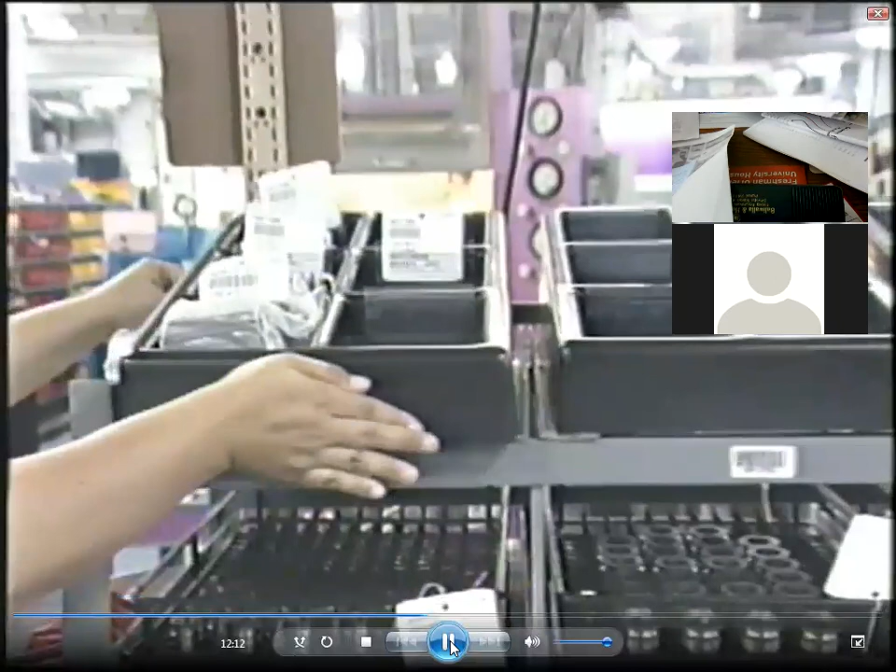With respect to the tooling, one of the things we face in our product line is high variety, low volume, high mix to deal with. So it's important to design a system that allows point of use for the things you use all the time, but also is very organized, so that for things you need occasionally, you know right where to go, right where to find them, and bring them back.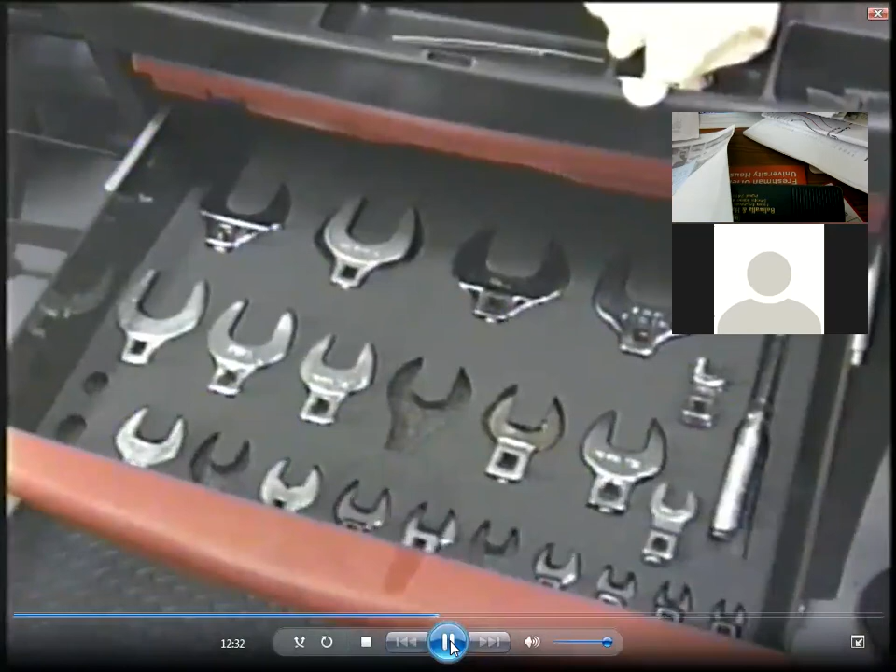After the exact tools were determined for each cell, a master list was created, and visual controls were used to maintain this standard. One of the keys to our success is this label right here. It's a Brother labeler, and it's as simple as having a label like this. It comes out right here.

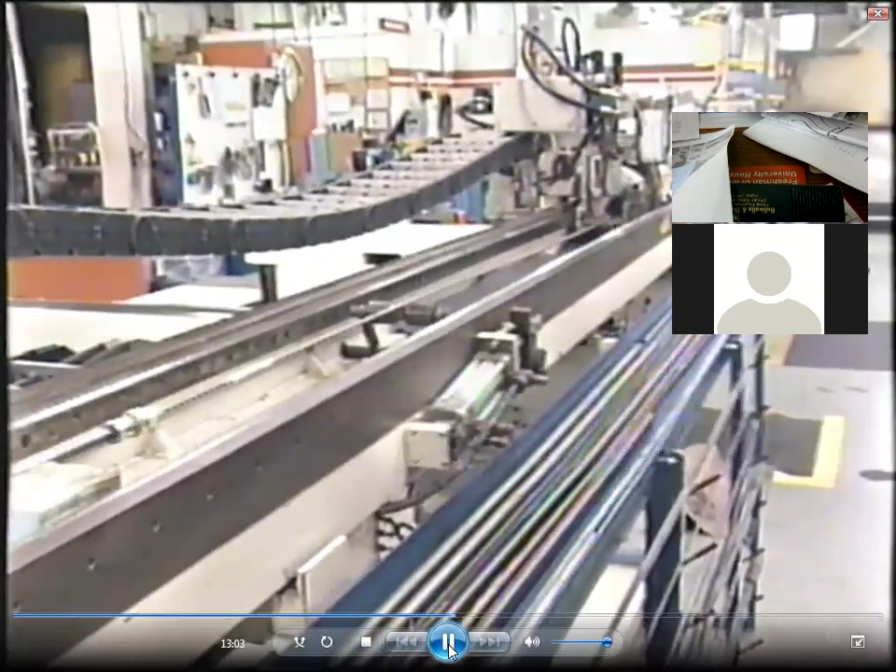Eaton also uses tool boards to identify tools at point of use. A good example of lean tooling at Eaton is how their mandrel rods are stored. The ends of the mandrel rods used to be mixed in drawers, where they were hard to locate and sometimes broken. But now the rods are stored right at the machine, and it only takes 30 seconds to find and place a new rod onto the machine.

To further simplify tooling organization, each cell has been branded with a different color. Within the cell, all the tooling and carts follow the same color scheme.

Eaton has taken lean tooling a step further with a technique known as heijunka, or leveling. To do this, Eaton had to ensure that jobs were scheduled at machines in a way that required the fewest changeovers. People used to come in the office, and this is how they were.

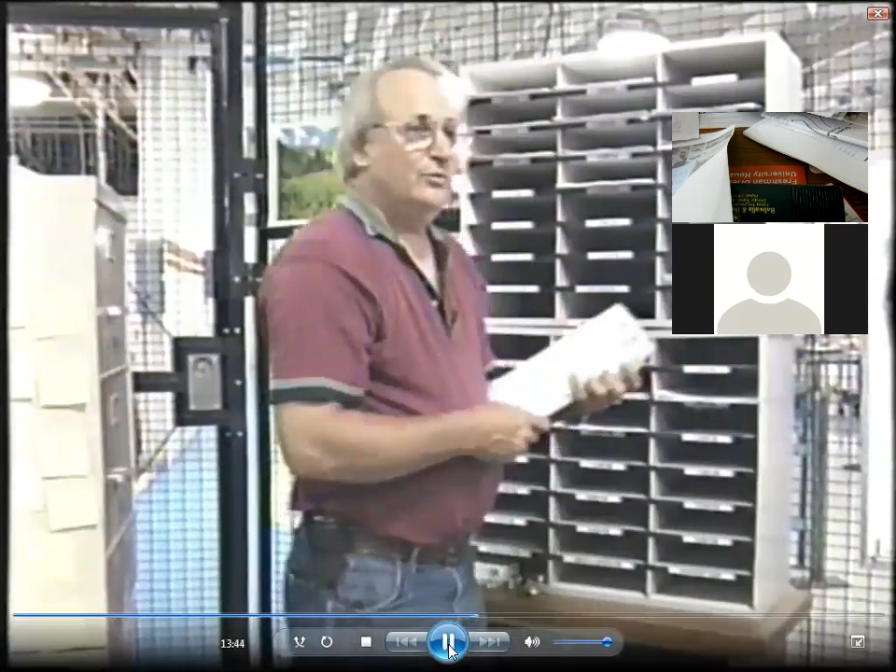When I first came in here, they'd look through and say, well, we want this one. I'll take this one and do it today. And let's see, I'll take this one here and do it today. They pick and choose, this way here.

Go back to something we discussed under theory of constraints. Remember that in the current state, when you do not have a schedule and you're doing something called push scheduling, and you have a bottleneck machine, what does the operator do? He or she says, okay, I ran a particular job, my machine is already set up for this particular job. If you are doing push scheduling, you are putting too many jobs in front of him or her to choose from.

So if you don't control the release of work into the system, you're giving them the opportunity to do exactly what this gentleman is saying, which is, let me pick something that will be run in the shortest amount of time. That dispatching rule in scheduling literature is called SPT, shortest processing time. On the other hand, what you would like is earliest due date to be the basis on which they pick the jobs, or in more sophisticated cases, the critical ratio rule.

But again, what's the beauty of theory of constraints? If you don't push work into the shop, then when those jobs arrive at the bottleneck, you are not going to have too many jobs in queue to allow the operator to do what's convenient for them to show that they're efficient. You now are forcing them, especially if you have a linear queue and the water spider is delivering parts in a certain sequence, to follow what the water spider knows as amenable to the best production schedule. That's what's important. There is no more of that.

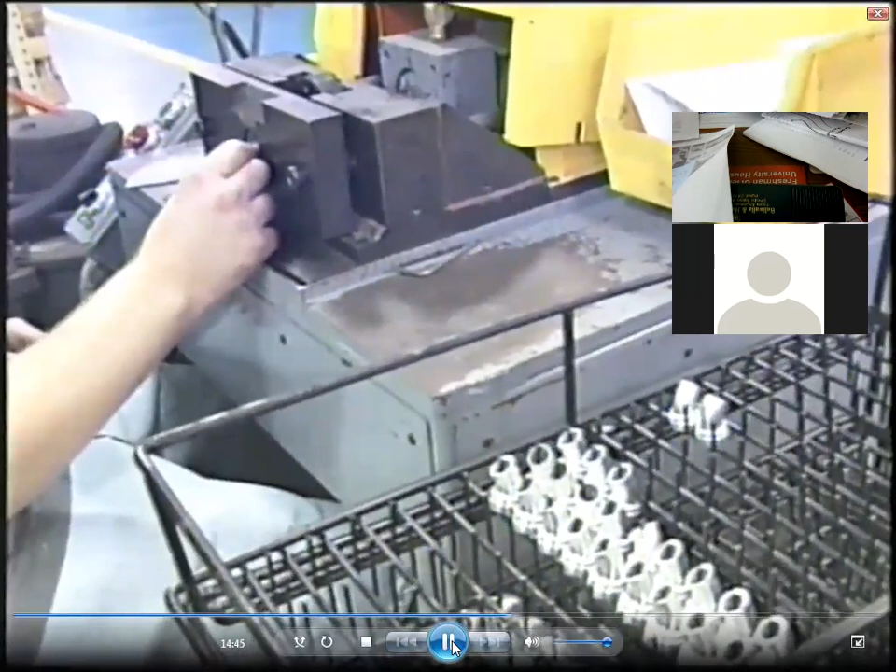Eaton Aeroquip believes that lean tooling is a vital component to its lean manufacturing approach. There's somewhat of a leap of faith involved in this whole thing, and I've been through it enough to know that you have to believe, and you have to drive it from the top. You will see the results, but you can't always quantify this stuff going into it because these aren't practices that we've normally done. It's like any other aspect of your business: it has to be organized, it has to be visually very easy to understand, and it has to be there when you need it.

K&A Machine and Tool, located in Jackson, Michigan, is a supplier of precision machined components primarily for the aerospace industry. K&A started using lean tooling when they realized that they couldn't achieve lean manufacturing without it. Carl Frid, owner and president, was leading the charge toward lean.

Today, we have to set jobs up 10 times faster than we ever used to. We have to be able to go from this job to that job in a matter of minutes rather than hours, due to the fact that we can't run the parts any quicker, but we can lose time in our setup. So that's our key, is to reduce our setup time.

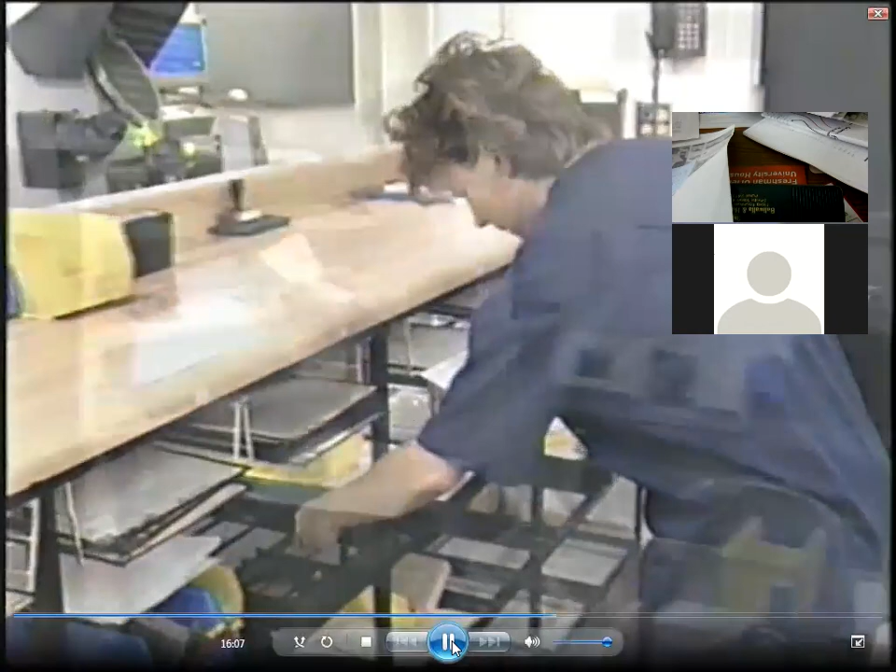Tooling at K&A is triggered when the operations manager delivers the job file to the tool crib. The tool crib manager delivers the gauge list to the quality lab, selects the appropriate tooling using the tool sheet in the file, and creates a tooling kit for the job. While the tool crib manager is collecting necessary tools, the quality lab is collecting necessary gauges and incorporating them in the kit. The tool crib has a location for each cell's next two jobs and a spot for the returned tooling from the previous job on the cell.

A tooling kit for each job is delivered by the tool crib to...

Again, I hate to remind you, but go back to the first couple of lectures in the class. Remember that example we had done from the Groover textbook about the milling machine operator who went back and forth from his machine to the tool crib to get the tools?

Today, there's actually an ERP system developed by machine shop owners. I think I mentioned it earlier, ProShop ERP, and the website is adionsystems.com. Let me know if you're interested.

They basically have automated the entire setup process. The tooling, the gauge issues, everything has been automated where in the tool crib, they know exactly what needs to be prepared. In the inspection department, they know what needs to be prepared. And the water spider essentially goes like on a pick route and collects all these items and delivers them to a location on a rack at the particular machine. So all of this has been automated—that's today's enterprise resource planning system.

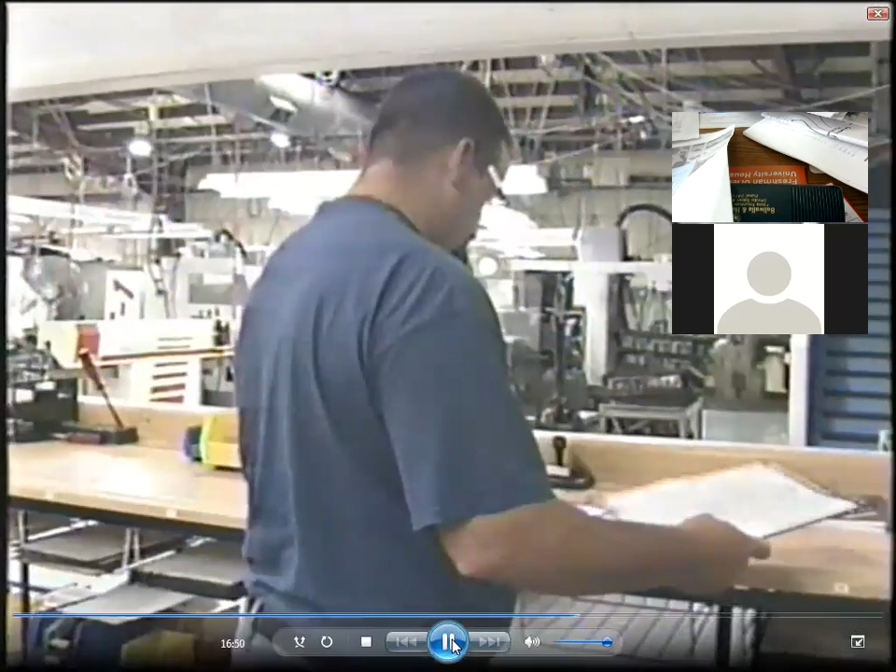Each cell has its next job ready to perform. The operator simply has to pick it up without leaving his cell. Each cell is color-coded; in this case, cell F is blue. At the tool crib, there are racks to match each cell. Inside the crib, files are organized by cell and date, with the next job to be run on top.

K&A uses a just-in-time pull system for tooling to make sure that they provide their cells with only what they need when they need it. When the operator needs those tools, they are available without searching, walking, or even asking. To let the tool crib know that the tooling was picked up, he raises the green flag. When the tool crib employee delivers the next job, the flag is lowered and old tools are collected.

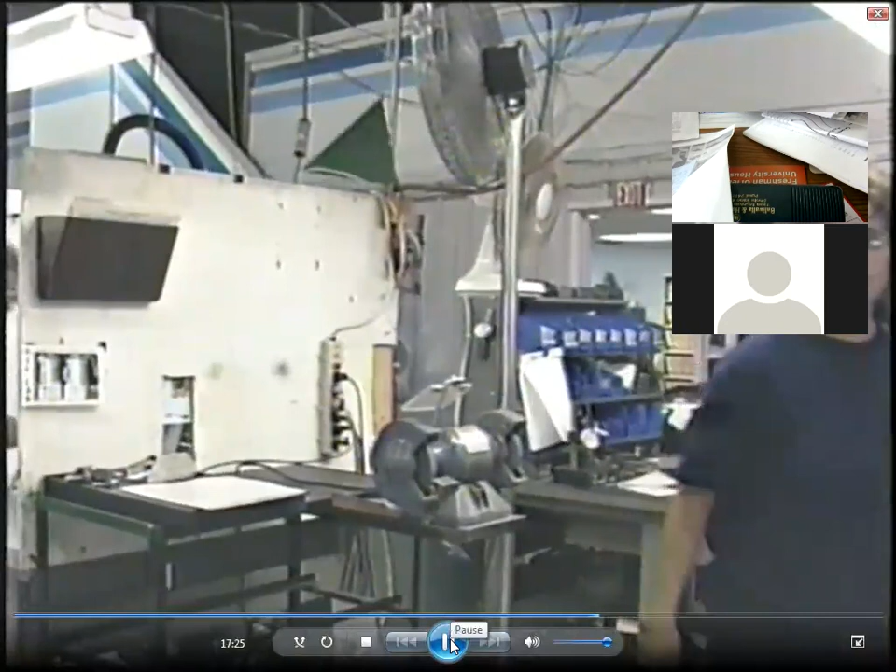Again, you might be thinking, what is this? Are we celebrating Independence Day and putting up flags and stuff? Well, this was the approach so many years ago. Today, it's a combination of the enterprise resource planning system, the manufacturing execution system, and the machine monitoring system.

I don't know all the details, and that's some of the recent work I'm beginning to do for my next book. But you can see here that these signals, which are being sent by the machine operator, say 'hey, I need this support.' It could be signals to maintenance, it could be signals to shipping, it could be signals to inspection, it could be signals to the operator.

All of these today, in the era of IIoT, Industrial Internet of Things, have pretty much been automated. So what you want to be doing, to increase your resume power, is ask: what is the technology out there? What smart manufacturing asset is available that essentially automates these proven approaches, which worked in the manual era, but now in a modern aerospace or medical machining machine shop can surely be automated, if not already automated.

This system can save hours of unneeded walking, waiting, and searching for tools. K&A found that very few tools were actually needed at the point of use. They found it was more efficient and less expensive to deliver most tools when they were needed.

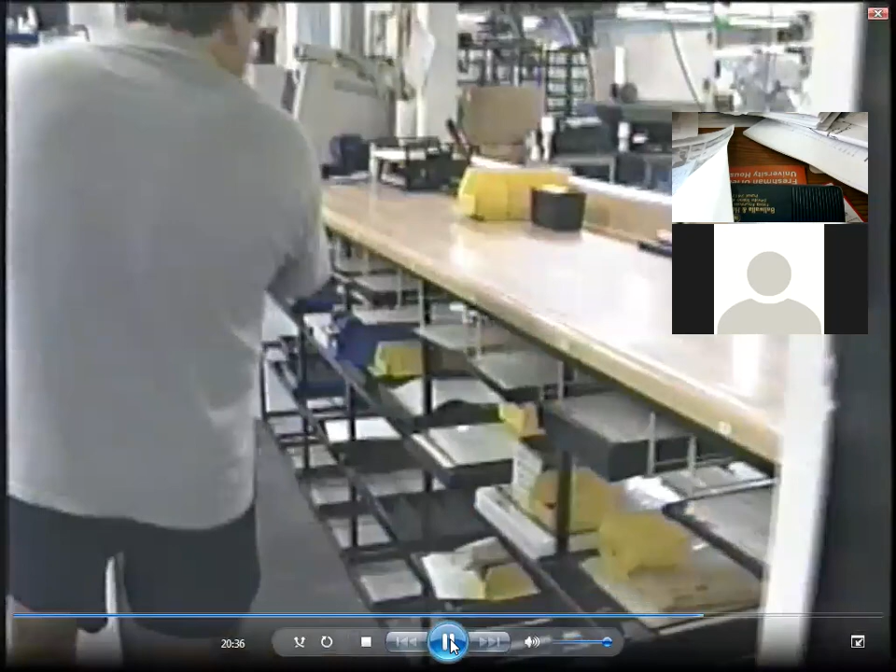K&A Machine and Tool believes that lean tooling must be brought to the shop floor through standardized work procedures, and those standards must always be examined to find new and better ways of doing things.

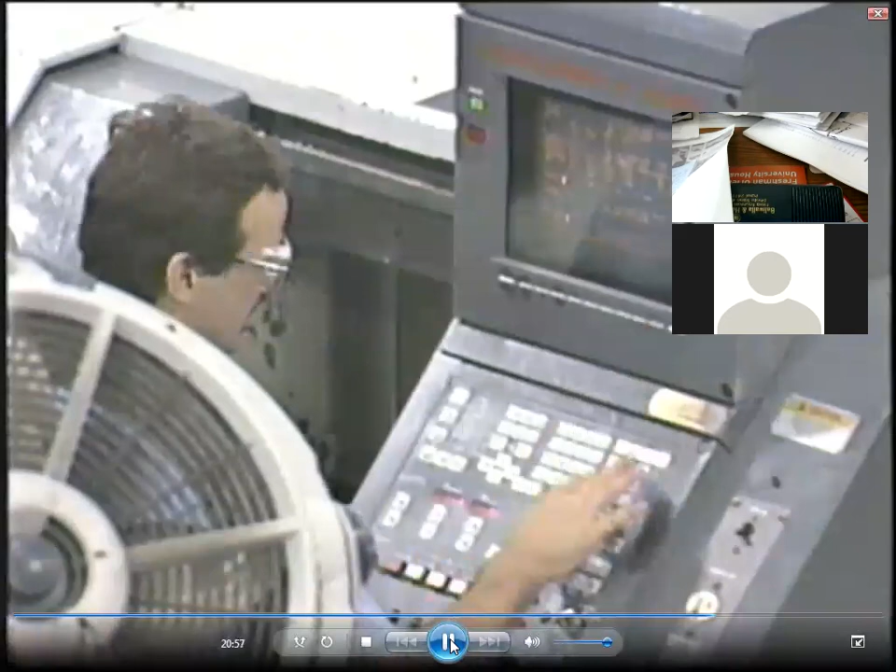Classic Turning, located in Jackson, Michigan, is a world-class supplier of precision machined components for the medical and aerospace industries. Classic has used lean tooling to drastically reduce changeover times on all of their machines. In their most complex cells, they have reduced changeover times from 5 hours to less than 75 minutes.

First thing we did was we sat down as a group and tried to figure out how to measure it. We found our worst cell, and the first thing we were looking at was how long it took to set up the cell. So we started measuring the times, and our times were 4.5, 5 hours.

For Classic, a half day of production lost on setup was a major problem. So the setup reduction team decided to use a support person to gather all tools and gauges for each cell. This keeps the machine operator from leaving the cell.

We start out with a tool data sheet. The tool data sheet should have all the gauges, work holdings, the tooling for each individual operation, the programs that were used for what operation, and what machines were being used in the operation.

It consists of the first op tooling. It should match the tooling for the first op on the tool data sheet, and we have each one usually labeled per operation. We have the second operation here, all the tooling that's involved with that, and we have the mill tooling, which is involved with the mill.

Sometimes we get to the point where we actually have extra tooling. In case one breaks, we have extra right here in the job box. You don't have to go all the way across the shop. We have parts in here that are partially completed, so we could use this one for a setup. That way you could set up the second or the third op without having to wait for the first one to be completed first.

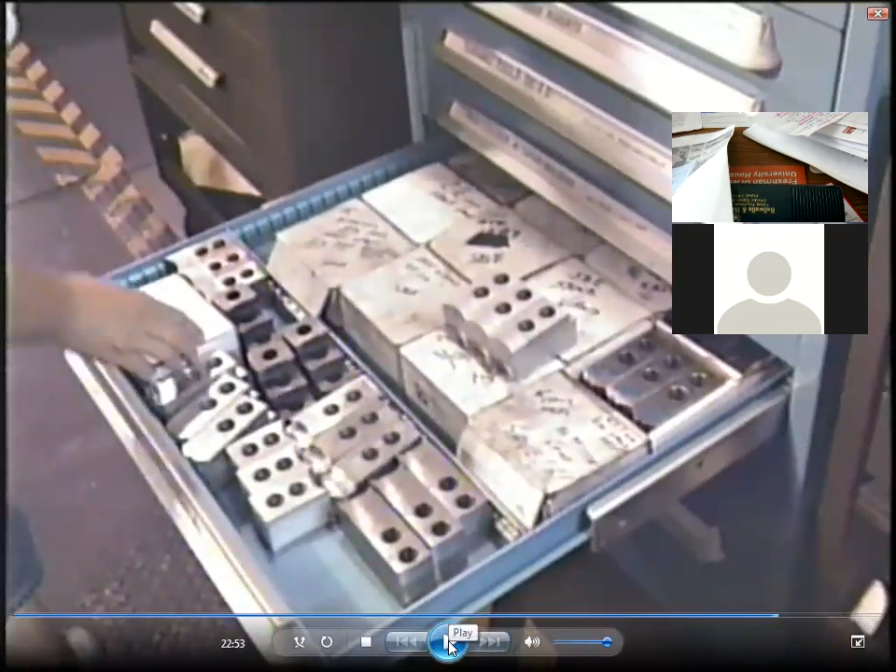But sometimes problems do arise while you're working. Go back again to theory of constraints: the second step, exploit the constraint. What did Jonah tell Alex, the plant manager? How much of your 8-hour shift are you using to actually cut metal? In a machine shop, you're cutting metal. In a heat treatment furnace area, you are heat treating a part. In welding, you're depositing molten metal. That's the true value added portion.

So when Alex said, no, we might be losing 2 hours per shift, the response was: yes, every hour of lost capacity is an hour lost to the entire system. What he was basically saying was, look, you have to take the capacity which you're paying for but not using because you're wasting it on non-value added work, and convert that to value adding time. Don't go in and pay overtime. Don't go in and buy new machines. Don't go in and hire people just because accounting will see only those options as means of creating capacity. Once again, guess who would do all that nitty-gritty work? All of you industrial engineers.

No, we do not have it yet. It has not been turned in.

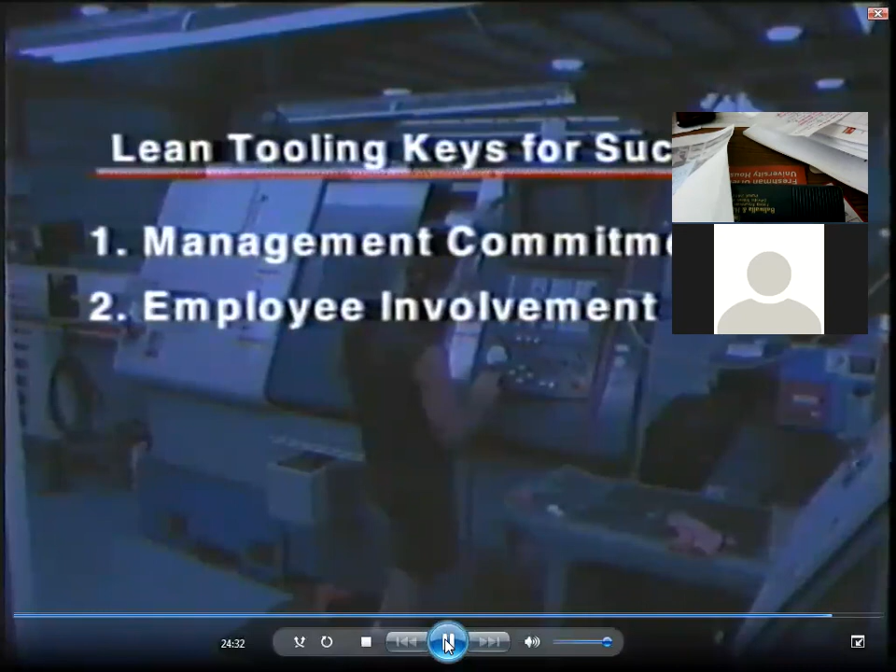The experience of these companies reveals 5 keys for Lean tooling success. The first key is management commitment - managers must set the goals, provide the resources, and stay involved. Next is employee involvement - employees are closest to the facts, and they are the ones who have to implement Lean tooling every day. The 5S system is an integral part of Lean tooling. Not only does it allow you to prepare for far-reaching changes, it will help you sustain those improvements.

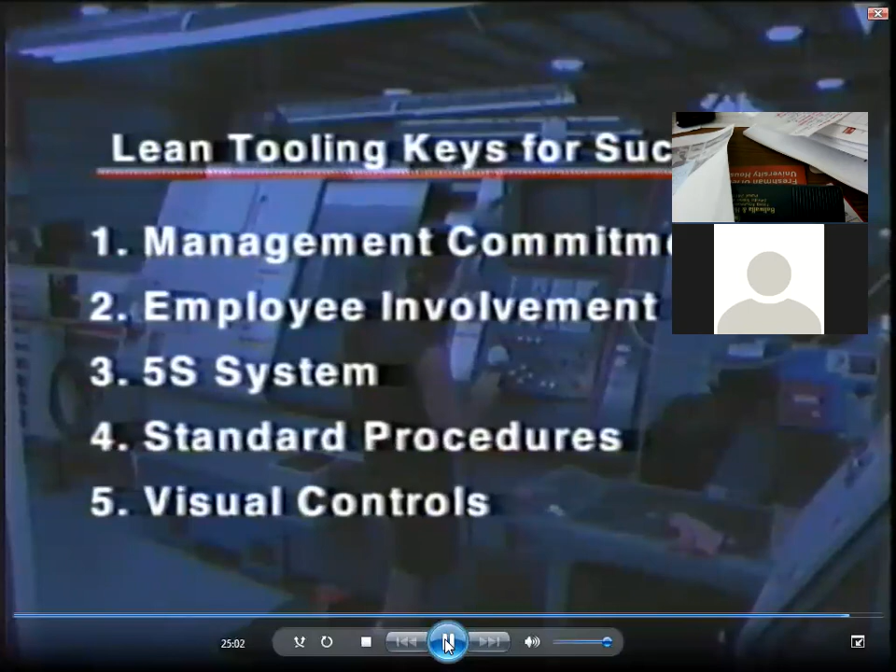Standard procedures for tooling activities are clearly an important aspect of Lean tooling, and something that is often neglected. However, standards are useless unless people will adhere to those standards. And this is where visual controls play an important role. Remember that the purpose of Lean tooling is to immediately cut costs, reduce production lead time, and ensure a quality product. So why do Lean tooling?

It's because it's an important part of your manufacturing system. And if you do all the other things right - and I've been involved in projects where we've done that, we've done every other thing right, and we found out, wow, why can't we get the production we need, why can't we get the throughput - well, because we got people wandering all over the place looking for the tools they need. So it's an important component, you've got to have it. It's like any other aspect of Lean that's often overlooked.

Hats off to the Society of Manufacturing Engineers, who teamed with this group of Lean consultants and machine shops. I found these two videos wonderful. They're a little dated, but all that's needed is to take those principles and adapt them for today with the industrial Internet of Things, mobile communications, and RFID chips to track tool usage and conditions. It's amazing what's possible today. But unless you have this higher view of value stream maps, work cells, throughput improvement, and cost reduction, you won't be in a good position to understand where to make improvements and how much technology to incorporate.